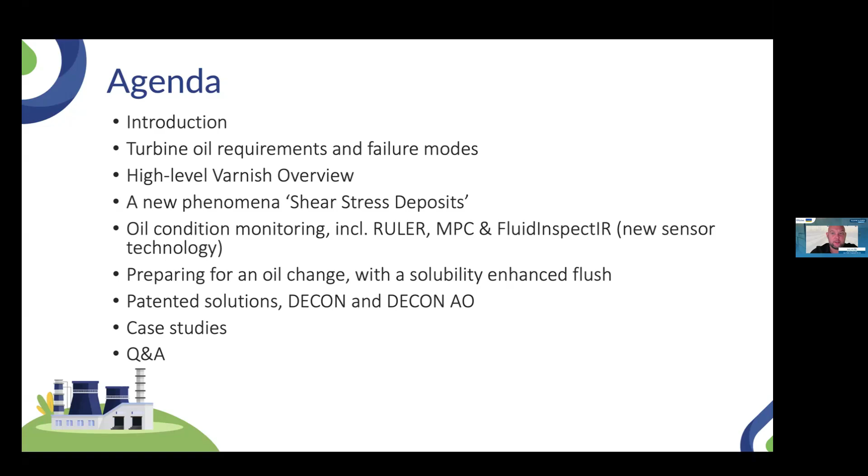All right, thank you very much. So let's get started. Who is Fluitec?

We are in the business of boosting our customers' profits, so your profits. And this coincidentally and conveniently also helps to save the planet, because when we use less, your profit increases, but also there are less CO2 emissions, which is healthy for the planet. So we have an opportunity to boost profits while being more sustainable. That's a unique situation.

You can see on the left side here that we have been certified by B Corp and Solar Impulse, which look at sustainable solutions in the world. We can save 50% or more on oil change costs and achieve 100% reduction in chemical waste. So how can we achieve that? That is what we are going to talk about today.

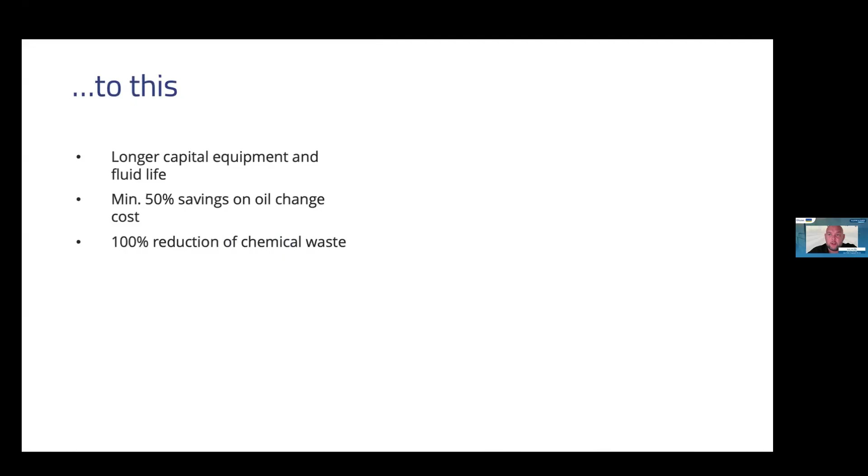We're also going to talk about something called Fill for Life, a new methodology that is now utilized and approved by the world's leading energy companies, but also by OEMs such as Siemens Energy and lubricant manufacturers such as ExxonMobil, for example. We want to go from a consumption model where every time-based interval you change the oil, to a circular model where we can achieve a lot of benefits, such as longer equipment life, and that's how we get these 50% savings on oil change cost.

We do that by changing to a circular model where we do a constant cycle of activities on your lubricants, starting from generating data and then applying the right solutions. That means we can extend the life of the lubricant to a fill-for-life lubricant. Instead of changing it on a time basis, we look at the condition of the lubricant, and if we treat it well, keep it clean and pure, then we can keep it in the system as long as the system is operating.

In short, if you do this correctly, you do not have to change your lubricants anymore. That's why it's called Fill for Life. This means we change from a consumable to an asset, and this has a lot of benefits, of course. I always say the biggest competitor to us, or the biggest obstacle that we face as a customer, is the way that things are being done right now.

It's not some other company that is offering these solutions as well, but we are always fighting the status quo because people are used to doing things in a certain way. The general consensus is if I'm okay now and I don't do anything, my operations are doing fine, then I'm going to be okay, right?

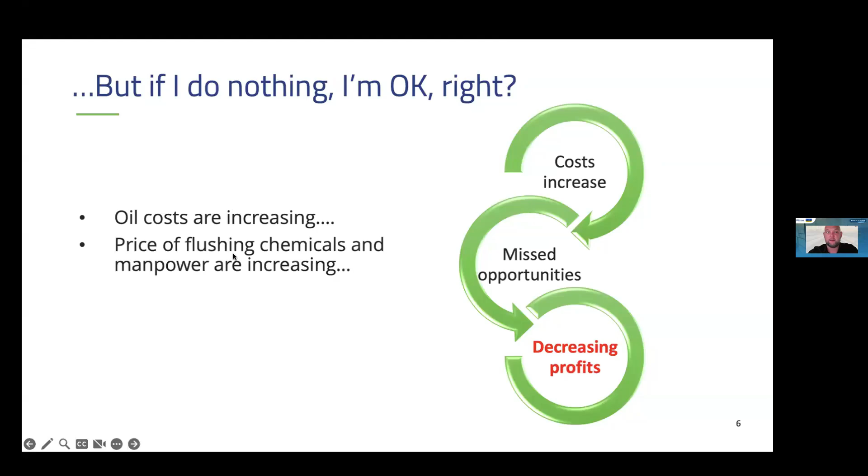But in reality, we're facing a world with ever increasing costs. In some areas of the globe, it's happening really fast right now. You also have opportunity costs that you will miss because you have an opportunity to be more efficient. The price of flushing chemicals and manpower are also increasing, and good manpower is becoming more scarce as well. And also from governments and industry bodies, there's a lot more scrutiny on sustainability.

Everybody is expected to do something to reduce their consumption. So if we don't do anything, we will decrease our profit. It doesn't mean we go bankrupt or there's going to be huge issues immediately, but over time we will be less competitive. So there are major benefits to be achieved by this Fill for Life methodology. And I'm going to show you a case study here now.

This is in a gas turbine driven compressor system where this customer, as you can see on the graph, was doing an oil change based on time. So every 4 years, this whole turbine driven compressor system, about 40,000 liters of oil was drained. The system was flushed and cleaned, and then new oil was entered into the system. At every interval, every 4-year interval, this cost them 350,000 US dollars. You can see that here, oil change 350,000, 4 years later, another 350,000.

So they trialed the Fill for Life to compare it to their time-based interval oil change. And they figured that they only have to invest 50,000 every 4 years into their system in order to keep the oil running. So they save 600,000 US dollars in oil change cost in this case.

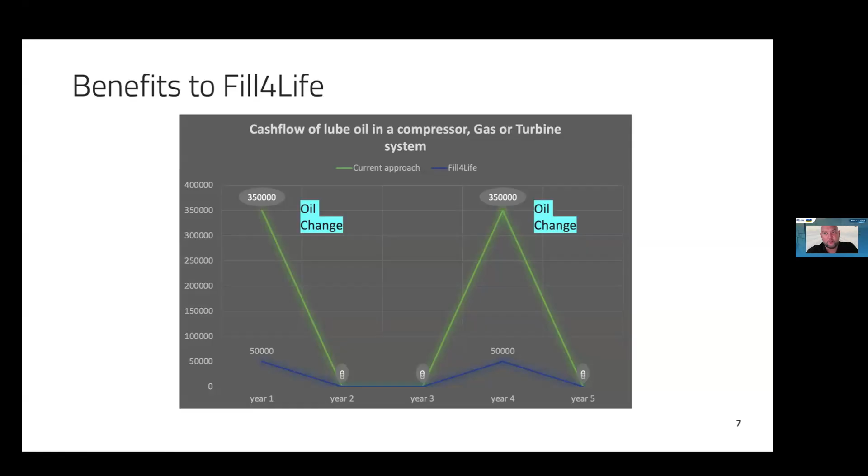So this is only on the cost side. They were already able to save 600,000. In reality, their benefits were in the millions of dollars because they had less downtime, higher revenue. So that's how powerful this Fill for Life methodology can be.

If applied correctly, you will enjoy these benefits of extended oil life, a lot of cost savings, reduced CO2 footprint, and every reliability engineer's dream, improved equipment quality and reliability. This also increases the quality of your production.

So what can we offer in the field to the customer? How do these products look like? It starts with consulting, and what we do today, I think, is also a part of that, where we share knowledge and new things with you.

And then condition monitoring are equipments that we sell to laboratory to analyze the oil. This allows them to be predictive, in some cases even proactive, with their lubricants. And this gives them an opportunity to look at the health of their lubricants and to assess how much life is really left in this lubricant. And that allows them to make data-driven decisions.

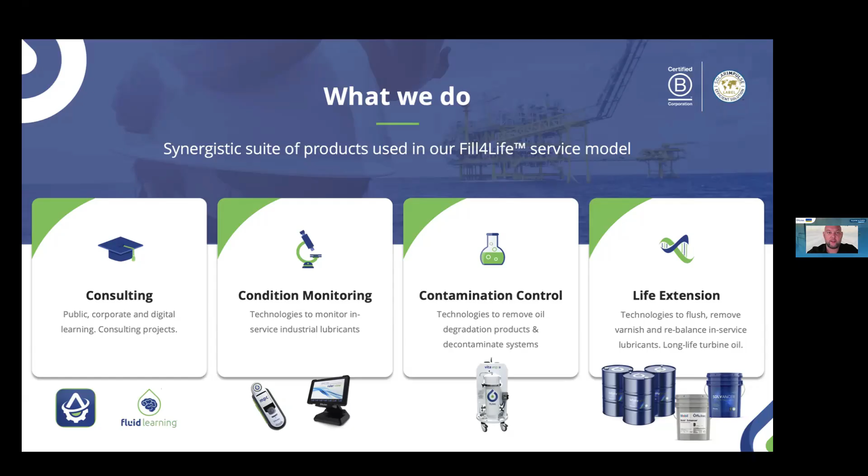For example, Tiara is one of the companies that will be able to provide these RULER and MPC tests for customers to allow them to look at the health of the oil. Then we can choose to do contamination control, which are specialized filters, or we go for what is now relatively new, life extension, where we can add solubility enhancers to the oil or certain chemistry that improve the performance of the oil. And when we combine all these things together, that's how we get to the Fill for Life service model.

But before we get there, let's talk a little bit about lubricants themselves and how we can optimize them, because what is the science behind all this? That's always very important. We're a science-driven company. So I like to show the slide.

Why is it? Because the oil industry is very often perceived as being a dirty industry. It's a dirty brown substance, it's going everywhere, and it needs to go away—all these things that we see nowadays in the market. But when you look at the reality, there is an opportunity.

When we look at how much friction is lost in energy production, including everything that is being produced, that is close to 50%. So of all the fossil fuels being burned to produce energy, almost 50% is being lost. The opportunity for optimizing lubrication means we can reduce this friction. Even if we reduce that by 10%, which is technically achievable, you are going to save a lot of CO2. So lubricants, lubrication, tribology—everything we are doing is enormously important in increasing sustainability and helping save the environment.

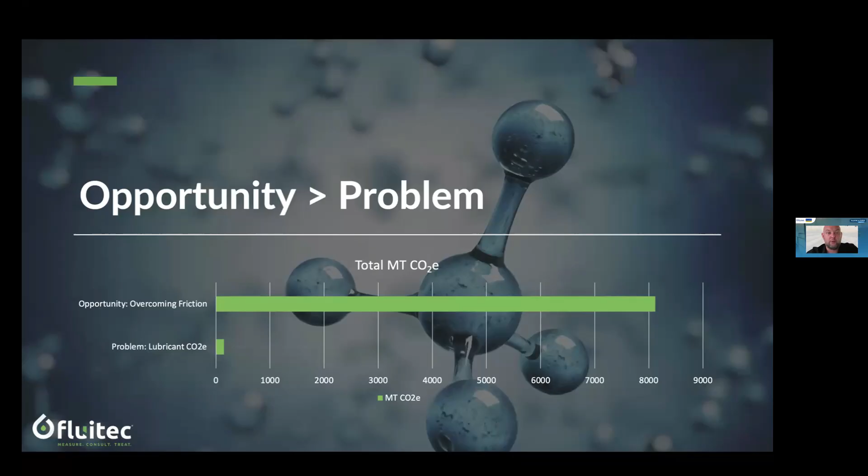So I like to show that because it gives you a different look at lubrication—from being something that's dirty and polluting the environment to something that's actually helping a lot with increasing energy efficiency. It's also a responsibility for all of us in this industry to optimize lubrication so we can contribute to reducing the environmental problem and be more efficient, because it has a big impact on the environment.

So in order to do that, we need to look at what an oil is supposed to do and how we can help that oil do its job. If we zoom in on turbine oils, which are the main oils used in energy production, we know it needs to resist oxidation and keep the equipment clean. It needs to provide excellent detergency and deposit control to keep the metal surfaces clean and keep the lubrication film intact.

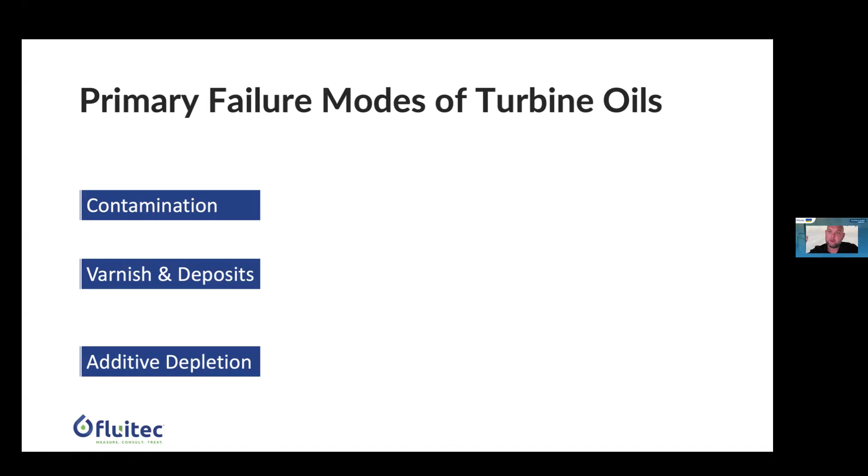But unfortunately, in reality, it's subjected to a lot of environmental circumstances and operating conditions that can interfere with this work. The three main ways a turbine oil fails in the real world are due to contamination, due to producing too much varnish and deposits which interferes with the oil's ability to lubricate, and also additive depletion. Over time, the additives inside the oil will be consumed by its uses and go down, and the depleted additives will form deposits themselves, and the oil will not be able to resist oxidation anymore if there are no antioxidants left.

Contamination will lead to increased wear rates, for example. If you have varnish and deposits in your system, you will experience things like valve sticking and bearing temperature instabilities. When your additives go down, your oil becomes very susceptible to sudden and rapid degradation, which will then be an immediate reliability problem, forcing you to shut down your system.

Luckily, there are solutions to all these failure modes. Contamination can be solved by filtration. Varnish and deposits can be solved by a special kind of filtration called ESP, or we can add something to the oil to prevent deposit buildup. Additive depletion can now be solved by replenishing additives to your oil. This is relatively new and has been recently approved by a couple of big OEMs, and is in use by, for example, ExxonMobil with their oils. So it's a new solution that is going to save a lot of money and trouble.

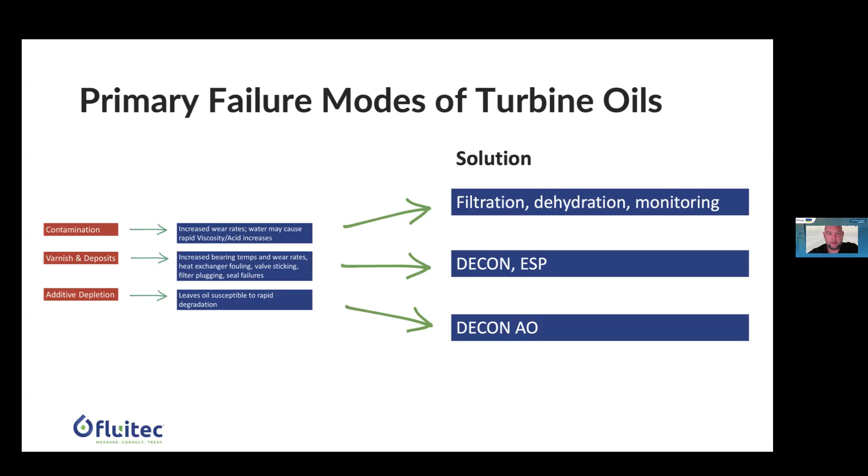So what is varnish? What do we mean when we say varnish? Varnish is actually a chemical change of the oil that is making up deposits. The oil starts to be consumed and starts to form chemistry inside—it starts to form different molecules that are then deposited in your system. So it's coming from the oil itself, and that's why we always say it's an oil-derived deposit. Unfortunately, it's very small molecules, very soft and malleable, and very often soluble in the oil as it goes through the filters. So your normal depth media filtration system will not solve the varnish issue—that is the main challenge. Keep that in mind as we talk about varnish.

So this is what happens on a molecular level. If there is any chemist in this webinar, I have to give the disclaimer positioned here on the right as well—this is for illustration purposes only.

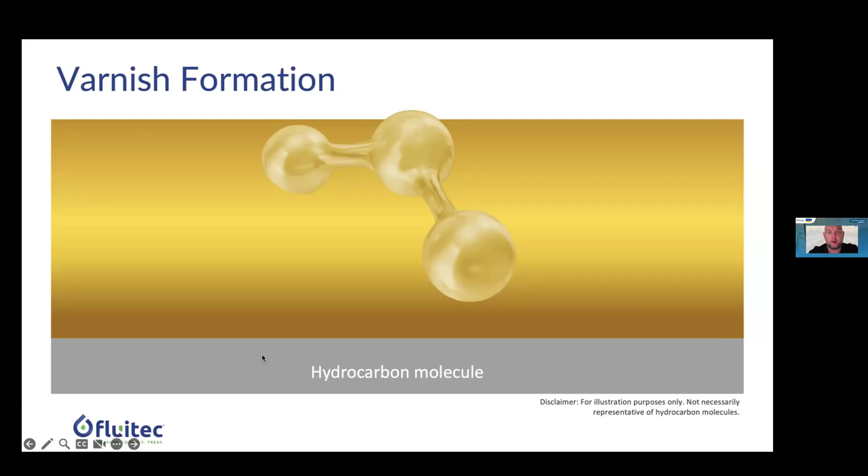It's to try to make you understand how this works on a molecular level. It's not an accurate depiction of a hydrocarbon molecule, you know this, but it's designed to make it a little bit more easy to understand what is happening in the process. So imagine this is a hydrocarbon molecule, an oil molecule that you see on the screen.

Now suddenly this is subjected to heat and it starts to oxidize. So what happens when a molecule oxidizes, it loses an electron. That means it has a positive charge, right? So it's a charged particle. You can think of something like static electricity, which we all encounter in our life.

If you ever, when you were a kid, you would rub a balloon on your vest, for example, and then you could stick it on the wall. It would stick there. You know, that is charging. That is static electricity. By the rubbing, you're actually destroying the molecules and you're creating a charge.

So this is also happening very slowly in the oil to your molecules and creating all these little charged molecules, which have a charged head here. So they are attracted to other things because they have a charge. And what they are very attracted to, what they really like, are other molecules that have a similar charge to them. So now you get likes like, that's a chemical term, believe it or not, like dissolves like as well.

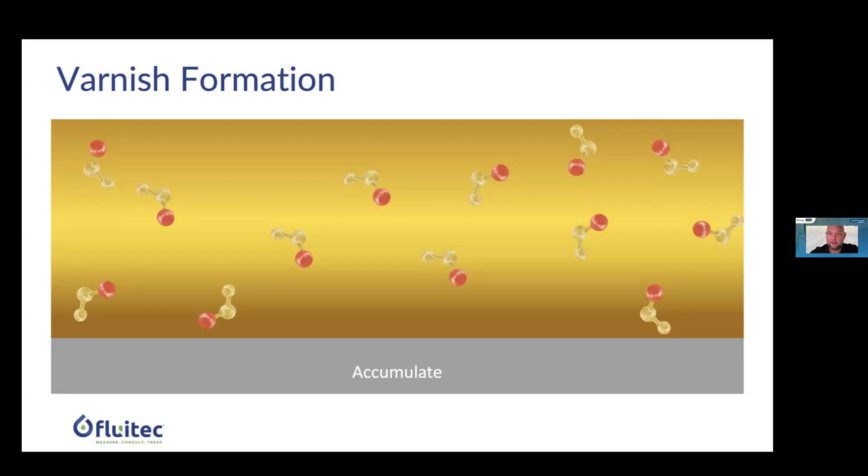So they like to go together. They like to bond together and they form. So they're floating in your oil and they make friends as they are floating along and they go together until they have created enough molecular force around their polar heads that they actually start to form a new molecule. So this is happening in your oil. Around this polar head, these molecules are agglomerating and forming now a new molecule, right?

Now the oil says, hey, I'm not designed for this. I'm not supposed to have you here. So it doesn't like it. It's a polar molecule in a non-polar fluid. So it starts to be pushed out.

And what then this polarity likes to do, it loves metal because metal is also having polarity. So they love to settle out after they multiply and the oil is no longer able to contain them in solution. They love to settle out into the metal.

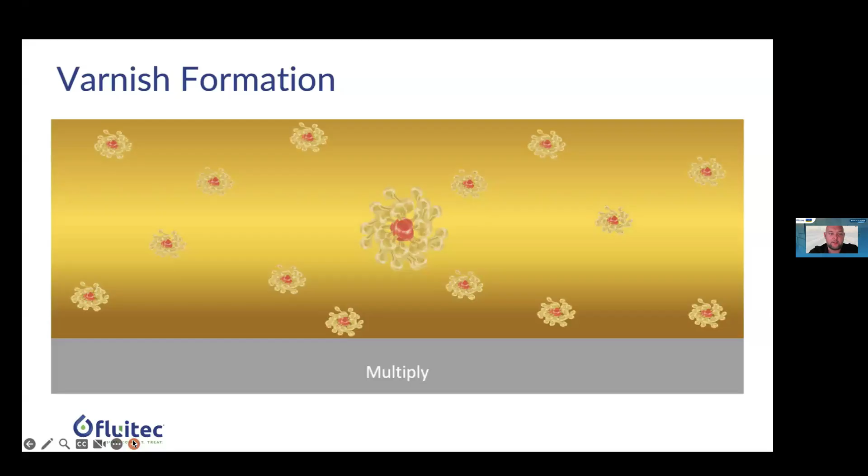Now, if you know metal, it looks like under a microscope, it has all these crevices and mountains. So these molecules can very easily settle inside these crevices and they will create a very hard layer of lacquer that is almost impossible to wipe. And you will need heavy detergents in chemistry in order to remove this again from your system. So this is how, on a chemical molecular level, varnish starts to appear in your system.

And once you have this, it will attract more molecules because remember, these are polar and here is oil flow. The oil is flowing past them. So if you have these varnish constituents in your oil, they love to bond together to these molecules as well. And it will accumulate and increase.

So when this happens in your oil, what happens? What do we see in the practical world? First of all, you will see your lube oil reservoir changing in color very often. But the main reliability issue that we see with this is sticking control valves. Blocked orifices to actuator valves, for example, leads to trips during startup. And that's the most common issue that we see when we have this issue.

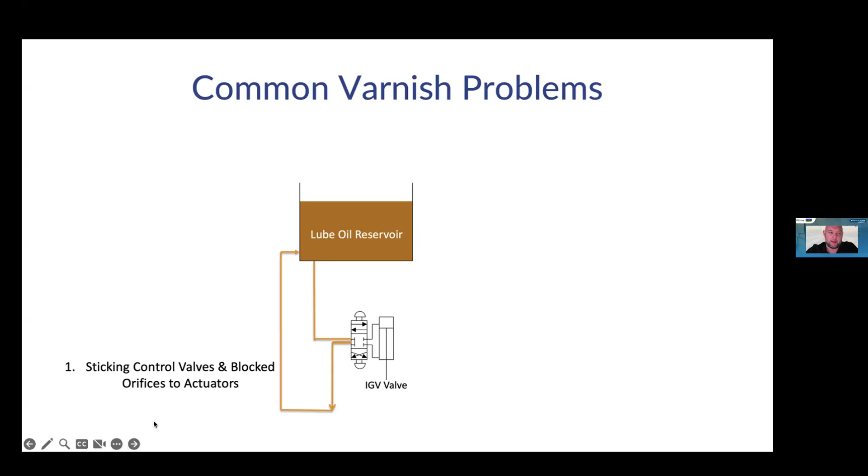Closely followed by increased wear and higher temperatures on bearings. So the bearing surfaces love to accumulate these varnish, and also it's a condition where the oil is subjected to a lot of mechanical force and pressure. So the molecules are very easy to be brought out of solution and they will form in the bearing layer. So that's the second most prevalent problem.

You can also get seal failure because the deposits are increasing the tolerances, allowing gases to penetrate the oil, and that will lead to even more degradation in molecules.

But also when we look at heaters and coolers, they are heat exchangers, right? And the oil is flowing. So when they are oil wetted, then at that point where the heating or cooling action is taking place, there is a lot of stress on the oil. And sometimes the oil flow is not that fast. So it gives a lot of opportunity for these varnish molecules to settle out onto the heat exchanger. And then you get an insulating layer of varnish or lacquer on the heat exchanger. And this greatly reduces the efficiency.

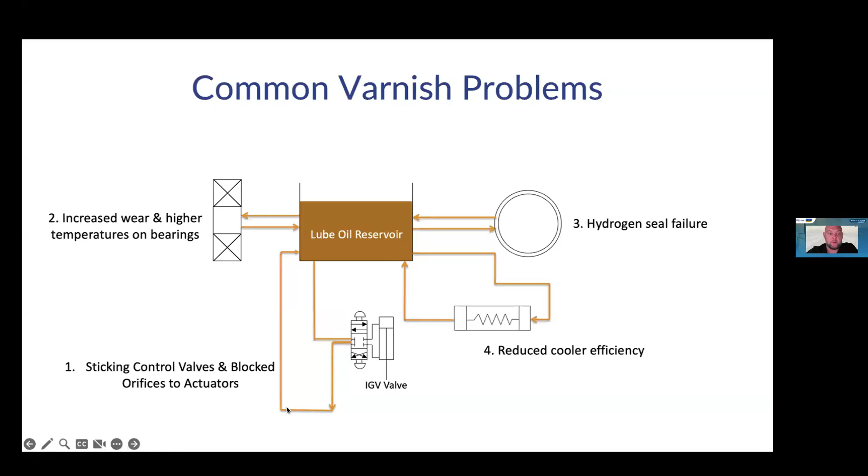So when we are able to solve this, we can also prevent all these reliability issues from happening.

So let's go through some examples that I've talked about. When we look at bearings, we can see varnish interfering with the oil wedge, meaning it's no longer able to form an oil film. Then you get these degradation molecules settling out there, and that means the oil will no longer be able to form the film. So you get wear of the bearing, and this will lead to increased bearing instability and vibrations.

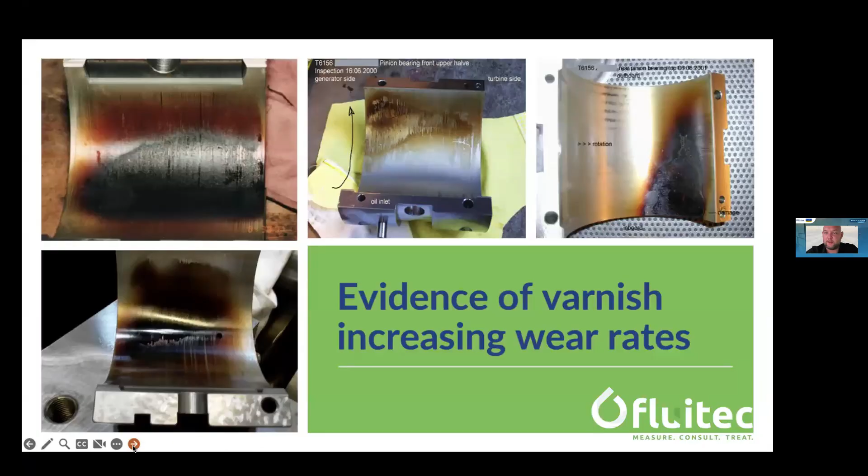Higher temperatures in general. Also on thrust bearings, you can see when they are coated with deposits, and then you get something called adhesive or fatigue wear, where there is metal to metal contact. Slowly the particles crack and then they will be released into the oil. Then you get what's called micro pitting, which leads to bigger openings in the metal. You get macro pitting, and this will lead to a failure. It can be very localized in your system, so maybe you don't even know that it's happening until you really have an issue that is occurring.

So this layer that you see here on the screen, this little varnish layer, is like an insulator, so it keeps the temperature. Remember, one of the main functions of an oil is to cool the metal, right? So it's to lubricate, to reduce friction, to prevent wear, but also to dissipate heat, to keep the system clean and to keep it cool. So when there is varnish in your system, the oil is no longer able to do this because this is an insulator that's keeping the heat, and the oil cannot dissipate it.

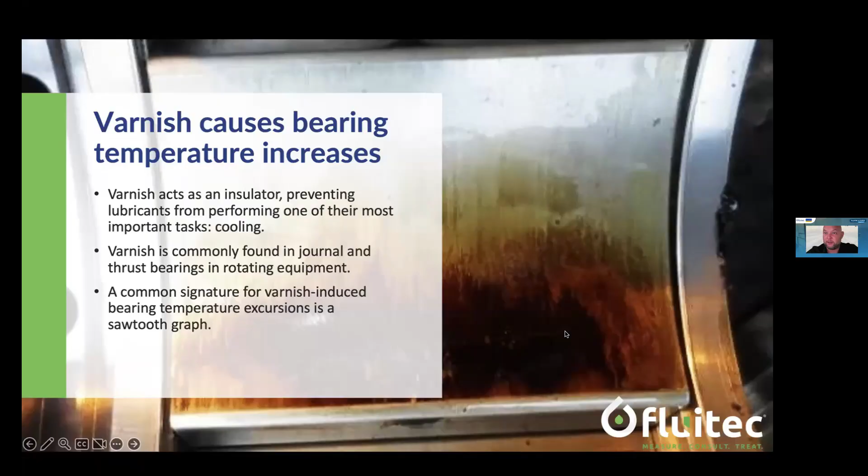So that's what we see when we look at this sawtooth graph here. We see bearing temperature starting to fluctuate. This is an extreme case where it went really out of hand. But when we see these kinds of spikes and then the temperature going down, we are very sure that this is due to deposits, because this layer of varnish will continue to change in thickness. So you get a buildup of varnish and then it becomes thinner again. Your temperature goes up and then it goes down again because there's a lot of pressure in the bearing. So intermittently, the varnish gets removed.

So when we see this typical graph in your bearing temperatures, we are already 99% sure that this is caused by varnish. So please have a look at your bearing temperature increase. If it looks like this, then we know that we have a varnish issue that we can solve.

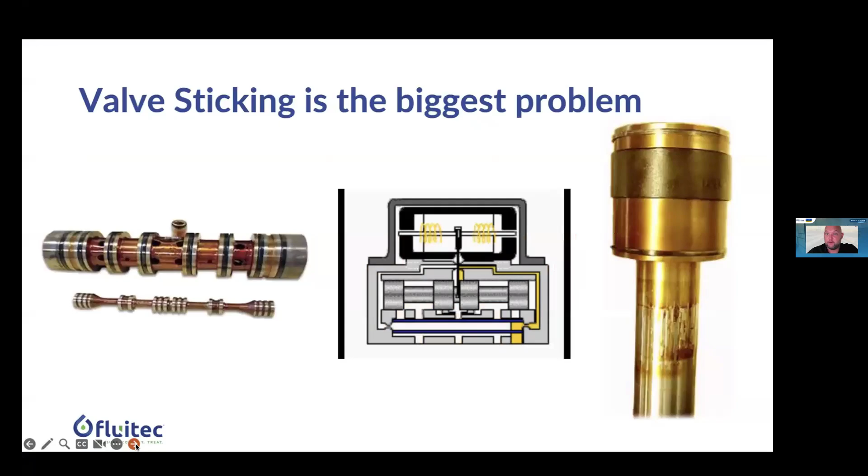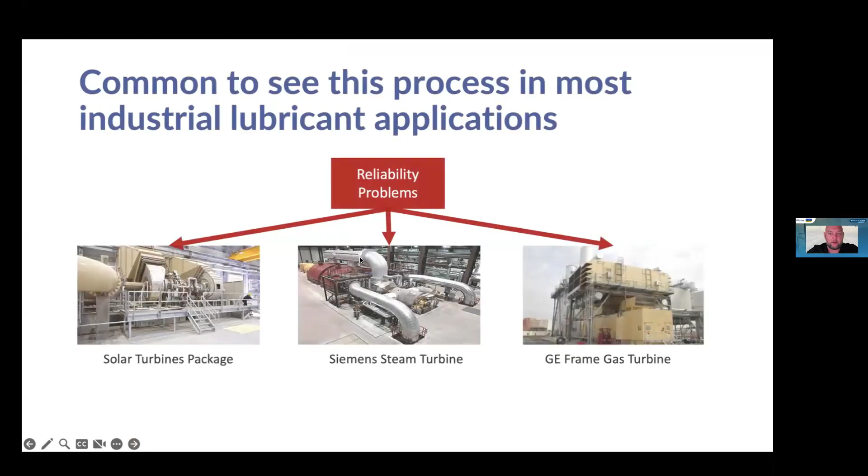Right, so that is general varnish and a high-level overview of what it does to your system. Now let's talk about this new phenomenon that we have quite recently discovered, called shear stress degradation. So what is this that is going on? Just now we explained how varnish can affect the oil as a result of oxidation. In gas turbines and steam turbines used for power generation, we know that the main failure modes are due to oxidation that leads to deposits and varnish. So we know where the reliability problems come from in the oil, but we saw something interesting in other applications.

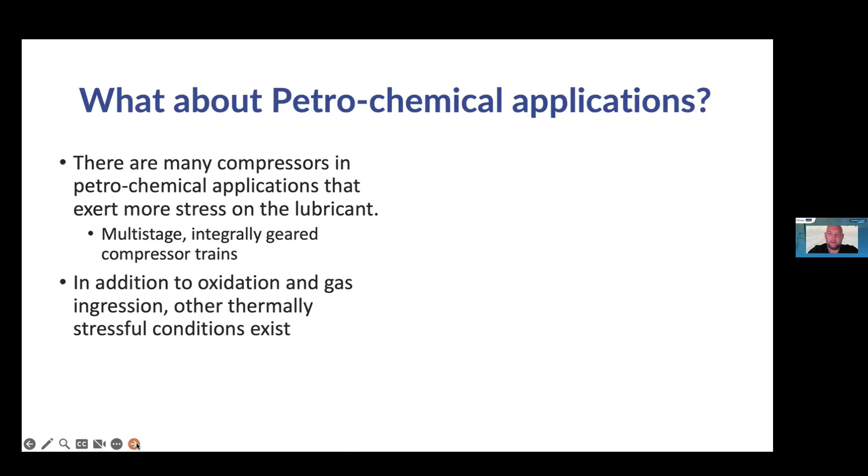Such as petrochemical, where we have a bit of a different demand on the oil, because these are very high rotational speed compressors, very high RPM. So there's a lot of mechanical stress being exerted into the oil. You can see here that some of these compressors have 50,000 RPM speeds or more. So you can imagine these are gigantic speeds, and the oil is subjected to a lot of stress.

We saw in a lot of cases this bearing instability happening, and it's happening more and more because of more demands on the equipment, higher loads, lower oil sumps as well, smaller oil volumes, but also different oil formulations and different properties of the oil.

We see a lot of these cases where we have the bearing temperatures becoming unstable and fluctuating. But then when we do an oil analysis, we see that very often the varnish indicator is still very low. So it doesn't really point to varnish being the issue, but we still see these bearing temperature fluctuations. So what is going on here?

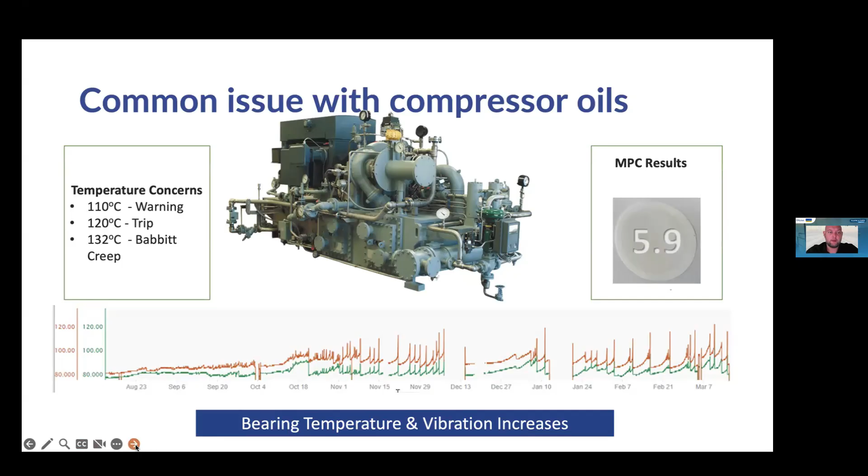We figured that the main mechanism at play is what is called shear stress deposits. And this is due to the very high temperatures that are generated inside the bearing. So I'll make this a little bit visual for you.

But to detect this phenomena, we need to use vibration sensors, temperature probes, or physical component inspections. So it's something that we really have to monitor physically on the equipment in order to detect it. Unfortunately, oil analysis is not always very reliable to detect shear stress deposits. So please keep that in mind in your reliability programs.

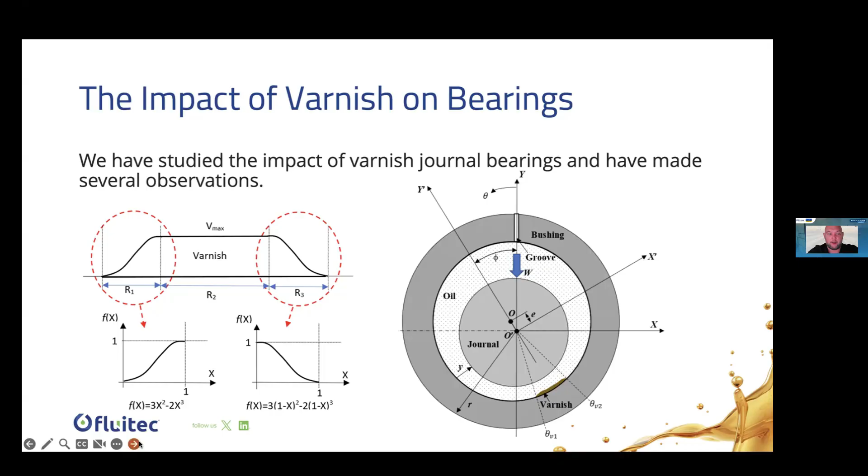But what is important to know is that we have done a lot of research together with the bearing manufacturers in order to figure out this problem, and that is how we discovered how it works. So this is just to show you that we have done our homework actually.

So what we have found is varnish increases temperatures, and it happens where the oil film is at its minimal thickness. So where the oil is thinnest, the temperature becomes the highest, and then in your big bearing system, you get only a very small patch of deposits that is being formed on a certain area in the bearing, which is usually where the hotspot is, right?

So that means the oil itself is fine. It is just generating this localized deposit, and that makes it such a tricky problem to analyze.

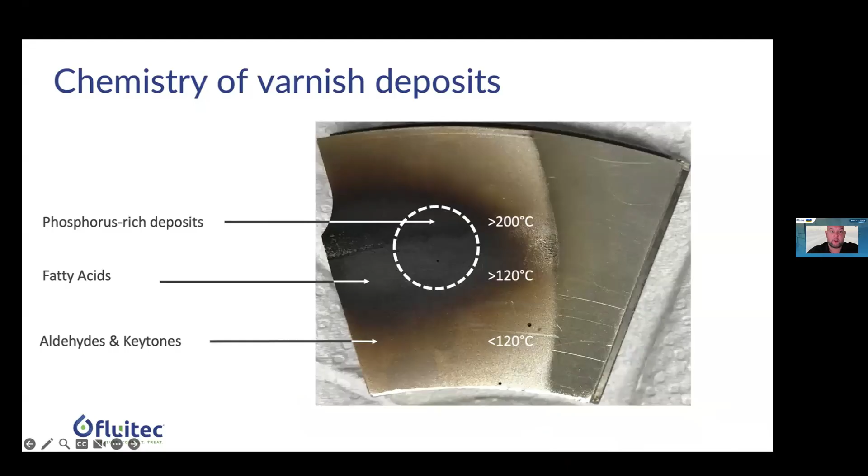So we saw that there are some things in the bearing that we know only react at temperatures higher than 200 degrees C. So for them to be on the bearing, we know these temperatures must be higher than 200 degrees C. And we're talking about phosphorus-rich deposits here.

So we looked deeply into it, and we saw that in the bearing, we have fluid friction occurring. So what does that mean? It means that, due to the rotational speed, there is an oil layer that is flowing with the shaft, and there's an oil layer that is flowing with the bushing. So you get a layer of fluid flowing in one direction, and another layer of fluid flowing in the other direction.

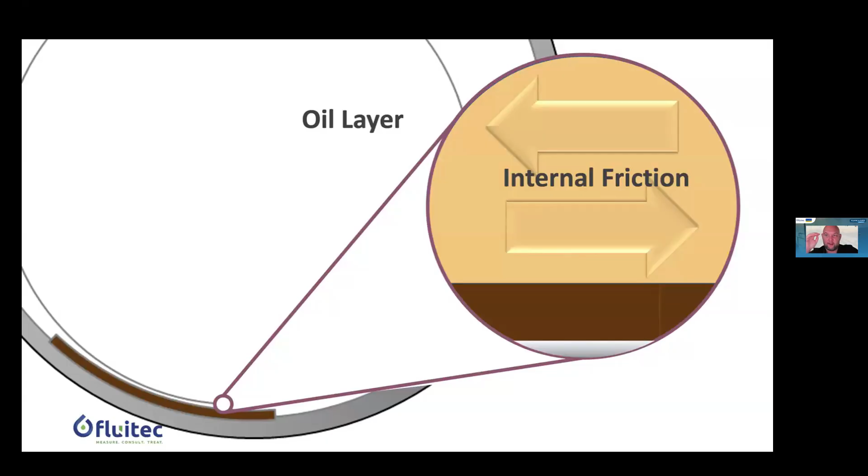So on a molecular layer, we get fluid friction, two fluids floating past each other, and this generates heat. It's very contradictory, I know, but because the oil film is so thin there, and there is pressure on the bearing, this allows heat to be generated inside the fluid.

So that is causing these temperatures locally to go up to 200 degrees C inside the oil itself. That means your temperature probes will not pick up 200 degrees C, but they will just see an increase in bearing temperature. The actual temperature inside the oil can be higher than 200 degrees C.

Now the oil is not designed for that, so it starts to decompose and it starts to generate shear stress degradation, and then you get these localized deposits that are attaching themselves to the metal. And then that is what we call shear stress deposits.

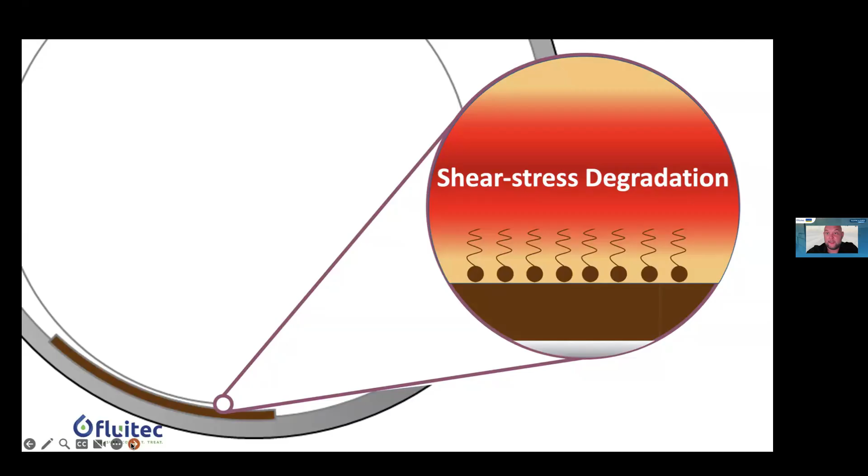They will build up over time, and they are comprised of many layers of degradation products. So it can be hydrocarbons that are destroyed there, or additives that are destroyed in that kind of environment that will then attach themselves to the metal. So that's shear stress deposits, right?

We will show you how to deal with this and how we can solve it at the end of the presentation. But in order to understand how we can better monitor all of this, we need to start with the basics. So let's talk a little bit about some oil analysis basics, right?

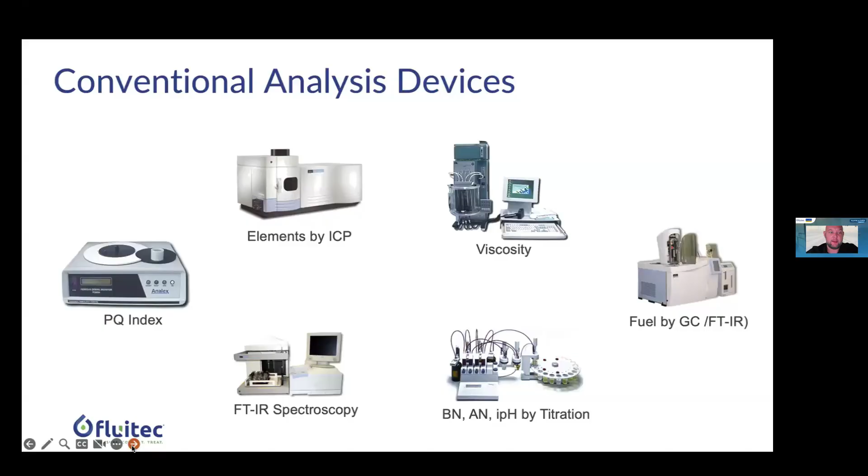So we have a lot of conventional oil analysis at our disposal, but in order to have a very complete turbine oil prediction, or condition monitoring program I should say, we want to perform a slate of tests on the oil, which consists of looking for varnish potential. Now, the main test to do that is called the MPC.

The MPC is officially ASTM certified and is now the most widely used test to look for bulk oil varnish. You can also use ultracentrifuge, for example.

When we look at fluid degradation, we can monitor how the oil's additives are being depleted. We do this via the RULER test to actually look at the amount of chemistry that's left in the oil, giving us a way of looking at how long this oil is going to last. And RPVOT, a performance test, looks at the actual oxidative resistance of that oil at any given moment.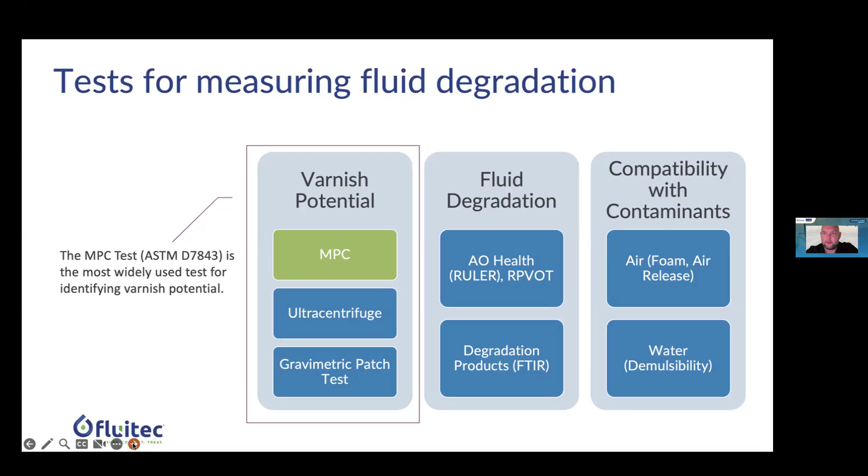So this is an example of an MPC test. With MPC, we run the oil through a patch, then we rinse the patch with a non-polar solvent to make all these varnish degradation products come out of solution and attach to the patch. Then we measure the patch and we get a delta E number that gives us an indication of how much varnish potential there is in the oil that we've just run through this patch.

We say anything below 15 is considered normal, anything above 15 to 30 is considered a potential issue, something we can work with. Anything above 30, as now indicated by most OEMs, is critical at this stage. So the number indicates how likely the oil is to form varnish in your system.

It's important to show there are some helpful things we can see physically from the oil, right? The way it flows, whether it has some sediment in there. Sometimes color can be indicative of something, depending on what color. But when we talk about varnish, usually color is not related to the varnish potential.

So you see here on the right side a very nice looking oil, light brown, translucent, looks great, but when we run the MPC test, it's actually critical, 37. So this oil is very prone to producing a lot of varnish. Whereas the oil on the left, you think it's dark and doesn't look very nice, but it's still clean and translucent, so that doesn't mean there's an issue.

When we run it through the MPC, it's actually only 9.1. So this oil might change its color because it's doing its job by keeping all of these contaminants in solution inside the oil, so that can also be a good thing. Color is not indicative of how well or not your oil is performing when it comes to varnish.

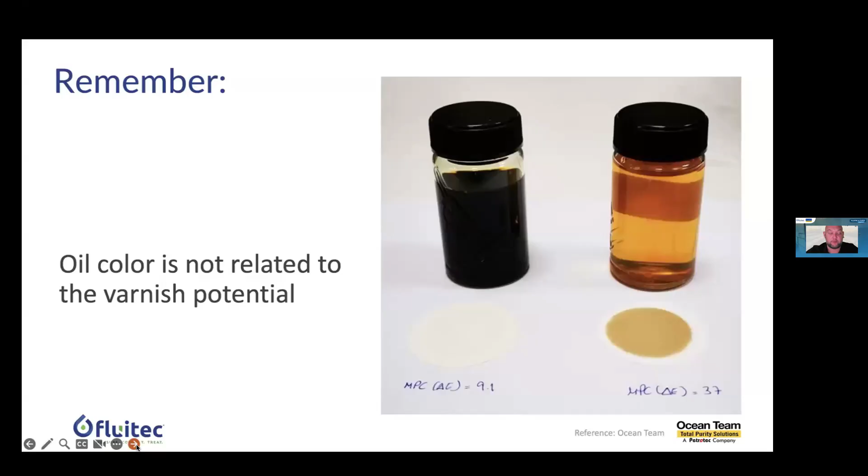We can also look at the colors on the MPC patch as an indication of some issues. Certain additives will give away a certain color. So when we know it has a typical gray, green, or black color, that's usually indicative of the ZDDP creating issues, which gives us a bit of an indication, for example.

So we have the ruler test and RPVOT. What can we do with the ruler test? It's a very important test to look at how much additive is left in your oil. It's always a test that's related to the new oil, so we compare the used oil with a new oil sample. In this case, we have a Mobil DTE 846 that is then compared to the new oil.

So the used oil is the red line here, and then we can calculate that a reaction is taking place. These are the aminic antioxidants and these are the phenolics. This oil has two antioxidants, and we can see there's much less reaction here on the ruler test, meaning the phenolics are almost gone because there's no more reaction. But the aminics in this case are still quite healthy, still quite a lot of aminics.

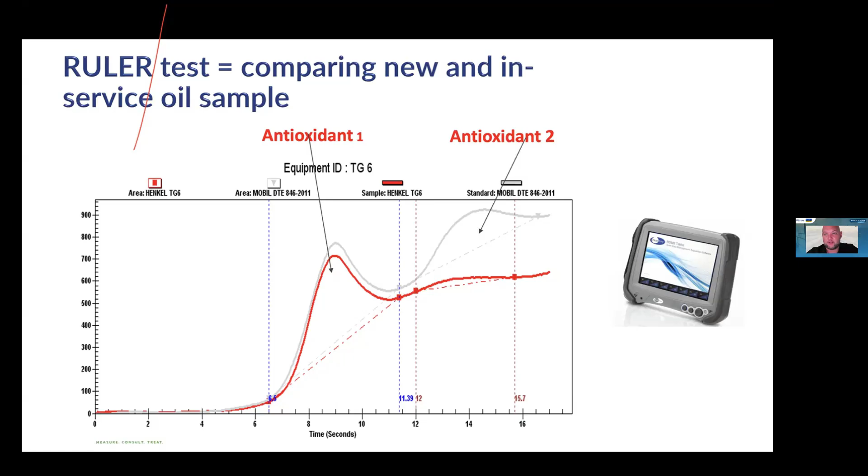So perhaps this is an oil that is still useful. But the ruler will calculate a value that we can then use to determine how much life is left in this oil, how much additive it has to resist oxidation.

So when we trend the ruler test, because it's a trending test, that's very important, we always look at different samples at different time periods. So this is not one test, this is the same oil tested six different times.

So this is the first one, second one, third one, fourth one, fifth one, and the sixth one is unfortunately completely collapsed. So nothing to see there anymore.

And we can compare this with MPC. What we see is always a correlation. It's not a direct correlation, but it's a pretty steady correlation between the reduction of additives and the formation of varnish. So the moment your additives deplete, typically your oil starts to produce a lot more varnish on the MPC test. So when we combine these two tests, we get a very good indication of how healthy your oil is and how likely you are to have problems.

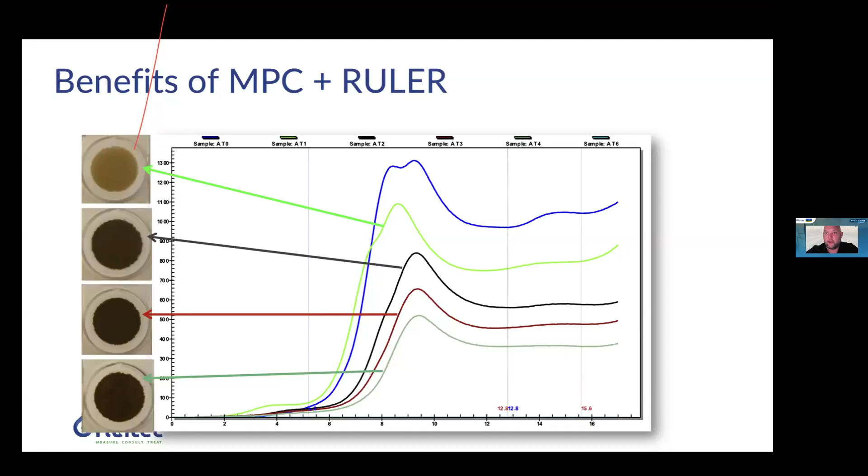And this also gives us a lot of data to then come out with an action plan. Because what we want to do with an oil, we want to keep the additive at a very healthy level. That means more than 50% of whatever secondary antioxidant or primary antioxidant is left in the oil. And we want to keep the MPC below 15. As long as we do that, we can say this oil is in a normal condition. As long as an oil is in a normal condition, there is no need to change the oil. So we keep it there. That means you can have your fill for life benefits that we showed in the beginning, and that's how we can generate a lot of reliability benefits and cost saving.

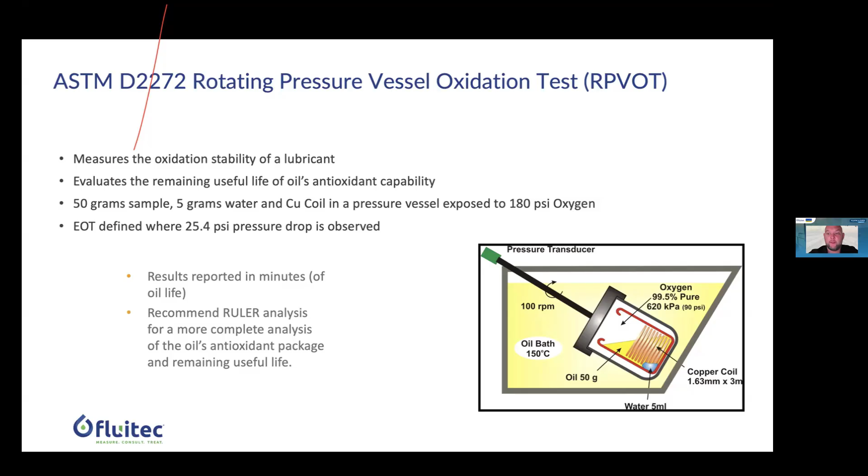So the RPVOT test, just briefly mentioning this, it's also a reliable test that is a very old test, being done for a long time to look at what is the current oxidation stability of the oil. It doesn't give you any prediction about how your oil is going to be in 2 or 3 months, right? We can only do that with ruler trending. But if you want to know how good your oil still is at resisting oxidation right now, then the RPVOT test can also help to determine that.

FTIR spectra can give you an idea of what kind of chemistry is in the oil. It can give you a warning when there are some contaminants, or maybe a wrong oil has been dosed into the system. And it also gives you an idea about how much antioxidant molecules are still inside your oil. The main difference between FTIR and a test like Ruler is that FTIR looks for the molecular signature, but it cannot detect whether this molecular signature is still an active chemistry. So it can also detect dead antioxidants that have already been spent, that have already been used up, but it's still being detected in the FTIR test.

So that's something that's very important to understand when we look at condition monitoring. Ruler, FTIR - sorry - is perfect for looking for contaminants and general chemistry in the oil, but it cannot tell you whether the molecule is working or not, or still interacting with oxidation. Only the ruler test can do that.

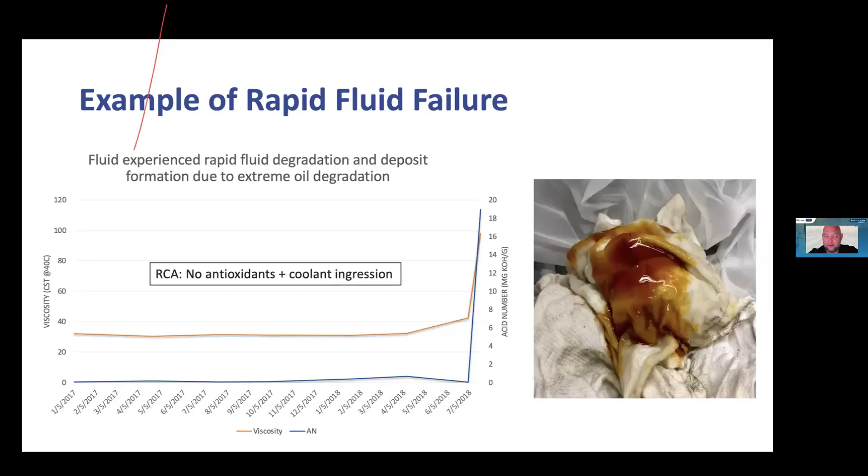So a little bit about online condition monitoring. This is now coming, and this is a new test. So what we see still, even though we do condition monitoring, we sometimes still see a very rapid failure due to oxidation, right? When you have extreme oil degradation, can be due to contaminant or some circumstance - in this case it was a coolant ingression - and there were no more antioxidants, and then you have immediately a failure. So to prevent that, we can add online sensors to the oil.

Varnish goes up, I should say, sorry. So this is the most important criteria to monitor to determine how healthy your oil is. And when you're in this spectrum, you can actually do a lot of action on your oil.

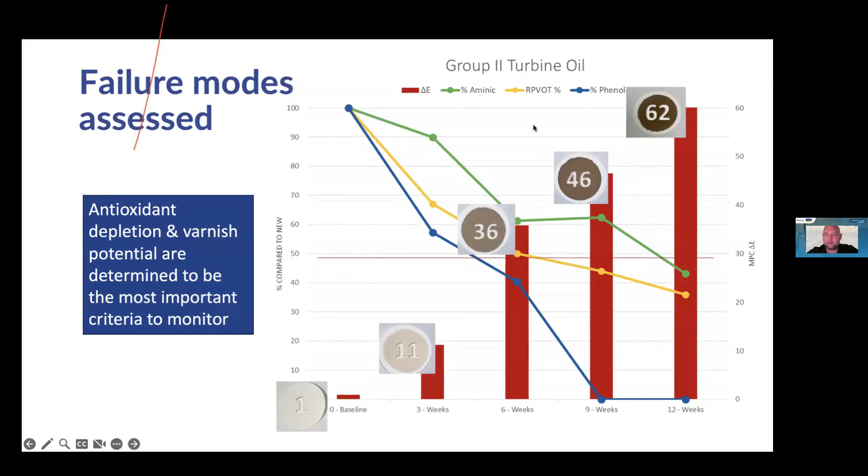So another thing that we can do to give extra certainty is online sensoring. So we can install a sensor that takes a little bit from the oil line at any given interval and starts to run an FTIR spectrum. That's why it's called Fluid Inspect IR. But this is an IR spectrum that is specifically calibrated to your oil. So when we install this, we also calibrate the sensor according to the oil. So it works through the wavelength absorption spectrum of an oil. So it's the same as an FTIR.

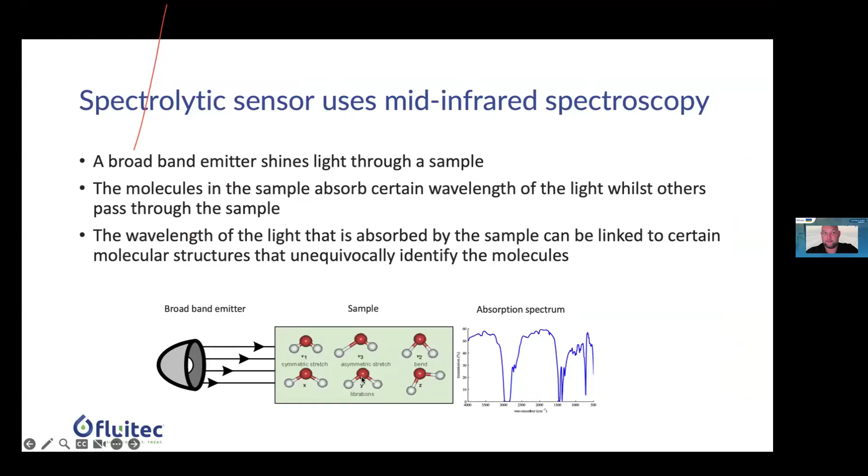And this gives you a good spectrum of what is the kind of chemistry that is in the oil. But it's doing this constantly at regular intervals, installed in your system, taking samples so you can have an early warning system.

It's optimized to measure the amine or phenol antioxidants that we see in turbine oils. It looks for oil oxidation, because when oil is oxidizing, it produces certain byproducts that the FTIR can detect. And when we have something called solvency, which is a protection against varnish, this sensor can also detect the amount of solvency left in the oil, so you know how good your varnish protection is.

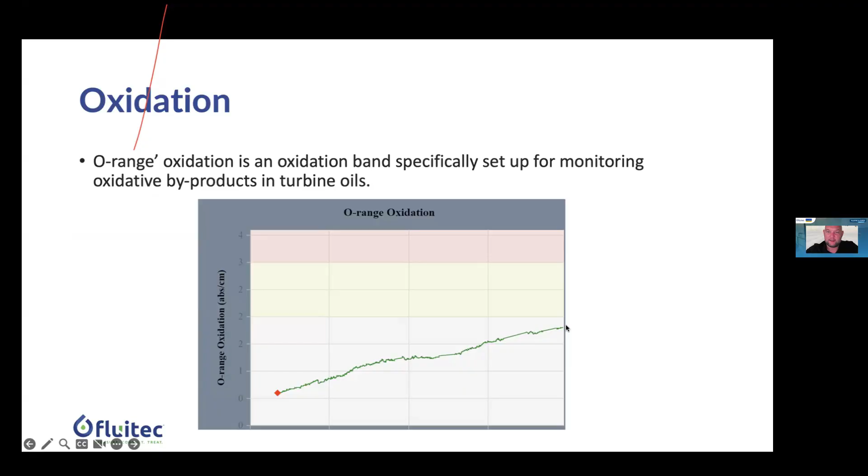So here you can see the oxidation byproducts that it can detect. This looks for the oxidation of the oil.

So that's condition monitoring, right? But let's also talk a little bit about some turbine oil performances in the market and selection of turbine oils, to help you determine what you can do to select the best oil.

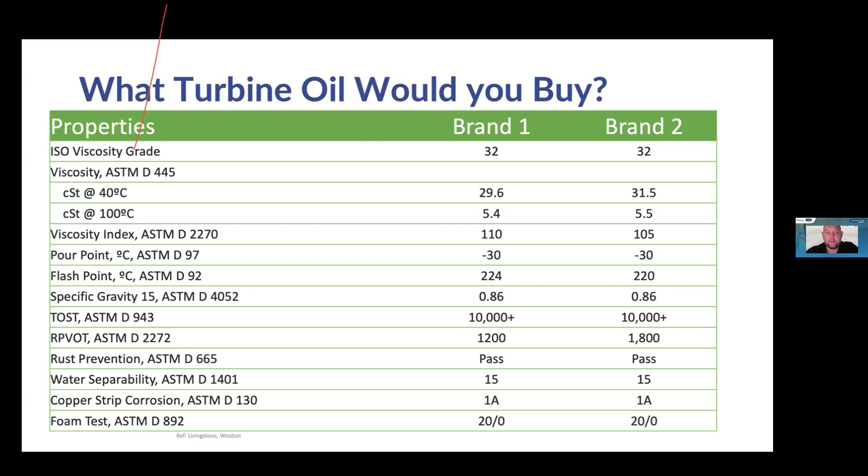Normally the oil is selected based on performance specifications shown on a data sheet, but this doesn't tell you that much about how well an oil is going to perform over a certain period of time. It might confirm that it meets the OEM specification, but it doesn't give you much more than that.

So we have devised a test that is now also undergoing official ASTM scrutiny. We expect this to become an official ASTM test, where we can predict how an oil is going to degrade. It's called the turbine oil performance prediction test.

The oil is in an oxidative bed at an accelerated, elevated temperature, which accelerates the oxidation. Then we take a sample cell at 3, 6, 9, and 12 weeks for testing. Every week in this test simulates about 1 year of real world conditions, so 12 weeks would mean 12 years in the real world.

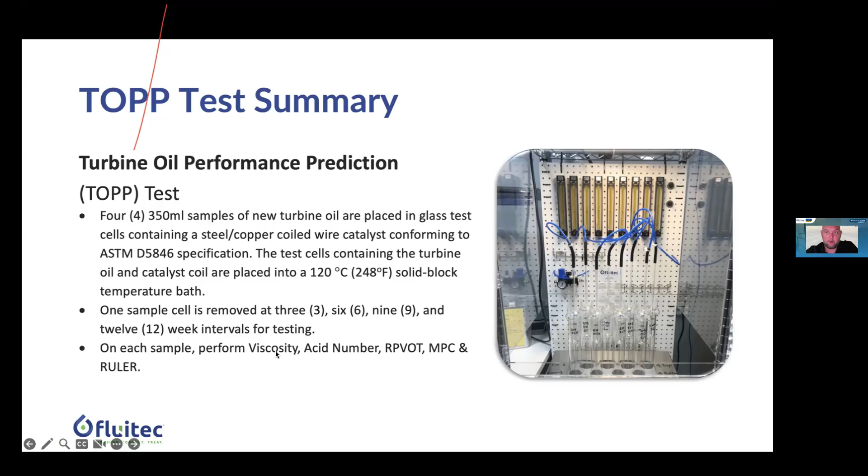And then we can do some tests on the sample to determine how well this oil is performing. So here we can see a very normal oil, one of the biggest market shares in the world. You can see it has quite a rapid increase in MPC, but the additives deplete pretty gradually. So you could actually do a lot of actions on this oil if this would be your degradation pattern in the real world.

But what was a little bit surprising, and maybe also a bit shocking to the OEMs when we did this with them, is that when we analyzed 31 different oils that are all approved by the OEMs, we can see that there's an enormous variety in performance.

So for you as an end user, if you have a turbine, which is a very valuable asset, you can choose any one of these 31 oils. But if you choose oil number 28 instead of, let's say, oil number 6, that's going to make a lot of difference. So your neighbor has chosen oil 6 and you have chosen oil 28, and you're having a lot of problems, but your neighbor doesn't have any problems because he chose a different oil.

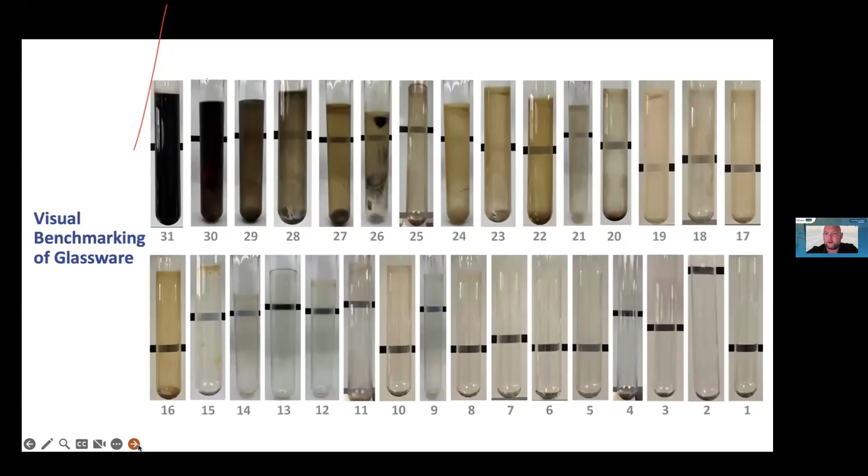That's the reality we are facing in the world. And this is not due to any hidden agenda or wrongdoing, because oil formulations are always a compromise. A formulation that performs well in one condition might not perform well in another. It also has something to do with availability of base oil, market conditions, the willingness of consumers to pay certain prices, availability of raw materials, and different branding in different regions. A lot of factors contribute to this wide variety of performances that we see.

So unfortunately, synthetic oils also do not solve the varnish issues. They still produce varnish, as you can see here.

So in order to make things easier for the end users, for our customers, we wanted to solve these issues of varnish. So we spent years, maybe even decades, for product developers to come up with a solution that is easy to use for the customer. And that means we do not have to undergo any downtime due to these issues. And this is now in the market as Decon, a proactive and preventative measure to varnish.

So what does Decon do? It stands for decontamination and deposit control. That means once you have varnish in your system, Decon can help you clean out this varnish and decontaminate your system. So it's a reactive way of doing things, but it can also be used proactively, where we add Decon to a system to prevent the varnish from building up in the first place. And that is the deposit control aspect of Decon.

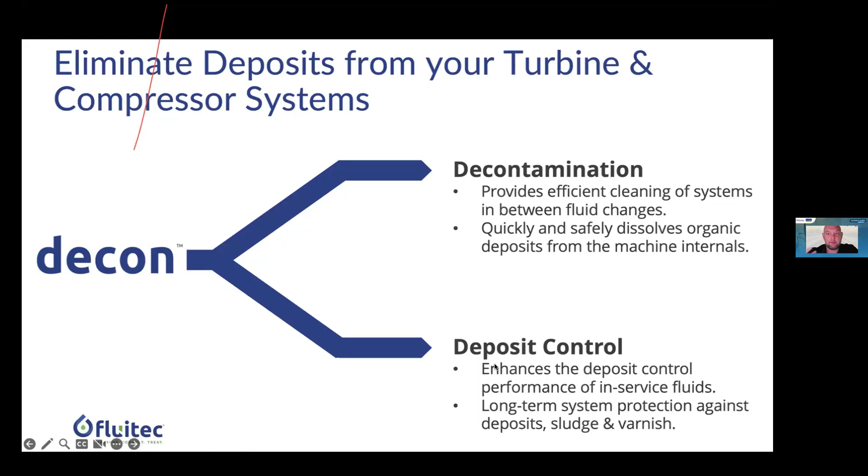So it can be in your system for as long as the oil is in the system. It is classified as a group 5 base stock, so it does not contain any additives. That means it's very benign to the oil, and it's compatible with any group 1 to 5 base stock.

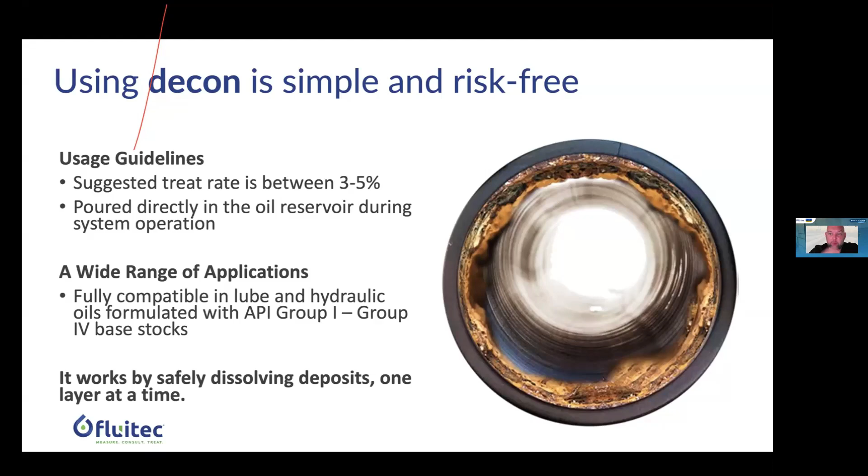Usually it's between 3 to 5% poured directly into the oil reservoir, and it's fully compatible with group 1 to 4 blended base stock. That means almost all the oils in the market, definitely all the industrial oils used in turbines and compressor oils. And it works safely by slowly removing the deposit, so you don't get a quick dump of material into your system. It really slowly dissolves deposits from your system internals, so it works in a very safe way.

So let's go back to our friends here, the oxidized molecules. Let's see how they are doing. This molecule, like we showed in the beginning, is attacked by oxygen and heat. And remember, this is now a charged particle that loves to interact with other charged particles.

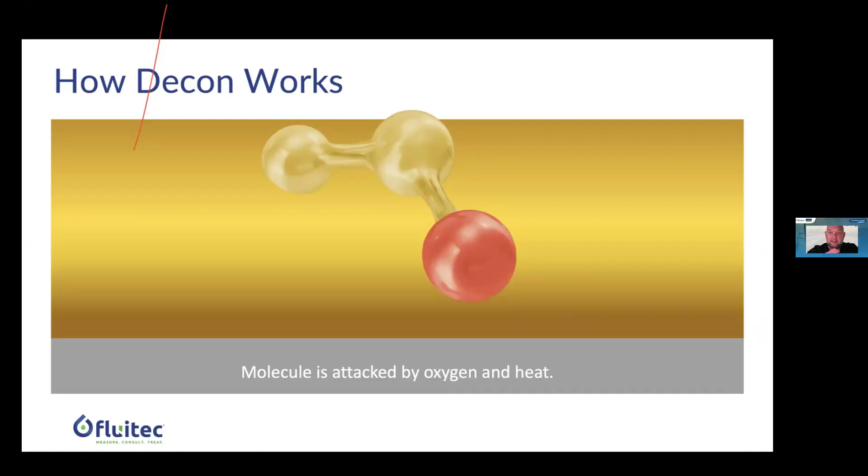But this end user has been very smart, and he has bought some Decon from us, and the Decon is in the system. So now, instead of having the reaction that we saw earlier, we have a different kind of reaction, because Decon is formulated to interact with this exact charge of the molecule. Due to something called hydrogen bonding, it is able to form a bond with the charged polar head of this molecule. And that means there is no longer a charge.

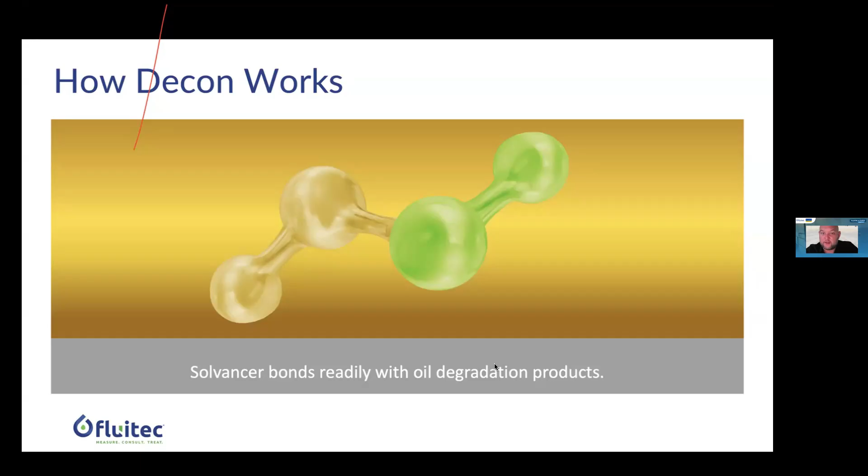This is forming a new molecule, and this molecule is no longer interactive, right? So Decon has stopped the interactiveness of the molecule. So when we have this in your system, it's a little bit different from before, because they are not interacting with each other. They're not friends anymore, they don't like each other, so they will just stay floating around, but nothing happens.

In the previous slides, we saw the agglomeration of the molecules, but with Solvancer and Decon in your system, this is not happening, so there's no agglomeration. That means the oil never has to vacate them. It never has to say, I don't like you, get out of here. You can stay in my fluid, I don't mind, I am perfectly able to absorb you. So they are very benign to the oil, and they continue to float around without forming any issues.

So this can be in your system for as long as you want, there's no problem that occurs from this. So that is the proactive way of using Decon. But what if we look at the reactive way? What if this varnish has already become a problem, and you have formed these layers on your metal?

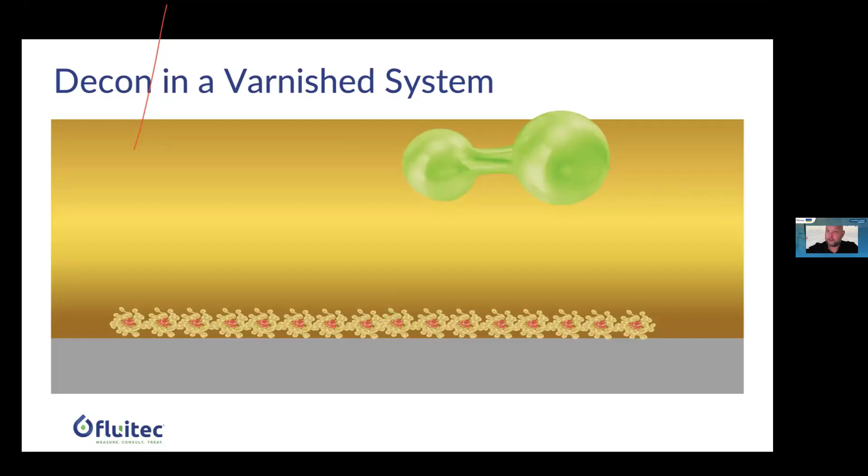Now we have Solvancer in the system, and through the same molecular forces, it is still attracted to these charged molecules that are already attached to the metal. As long as there is oil flowing past these molecules, Decon will be attracted on a molecular level to them. So it will like dissolve like, it will be attracted to the polarity of the molecule.

And once it goes into the polar heads of the molecule, it has dispersive forces. So the polarity is then reversed, and you get dispersive forces, for example, which dissipates this molecule. It makes this bond, because it's a soft bond, come apart and disperse the molecule into the oil. And when this happens, the oil is reabsorbing the varnish.

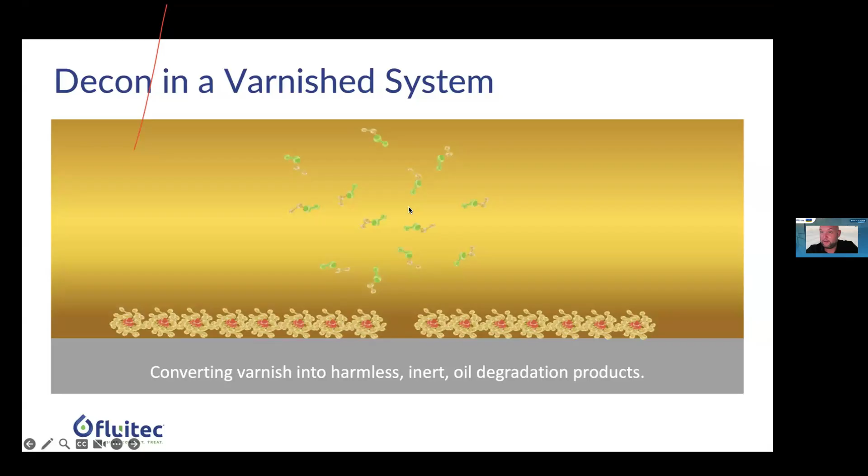And this will happen relatively quickly. You have a lot of solvent in your system, so it will convert these molecules into new molecules, and these are completely benign and inert in your system. It will continue this process until the varnish is gone. So you will completely dissolve the varnish present in your system, on your valves, on your heat exchangers, on your bearings, all these locations where varnish has settled on the metal. Decon will completely remove it.

Just to give you an idea, usually when we have a lot of varnish in the system, this equates to about 400 to 500 ppm of material. That's the actual volume of the varnish in terms of parts per million. So with Decon, when we add 3 to 5%, we're adding 30,000 to 50,000 ppm of solvents or molecules. We really want to overwhelm these varnish molecules with Decon molecules in order to combat this issue. We have more than enough molecules in the system to combat the varnish, and Decon will continue to work for a long time, probably long after you change the oil.

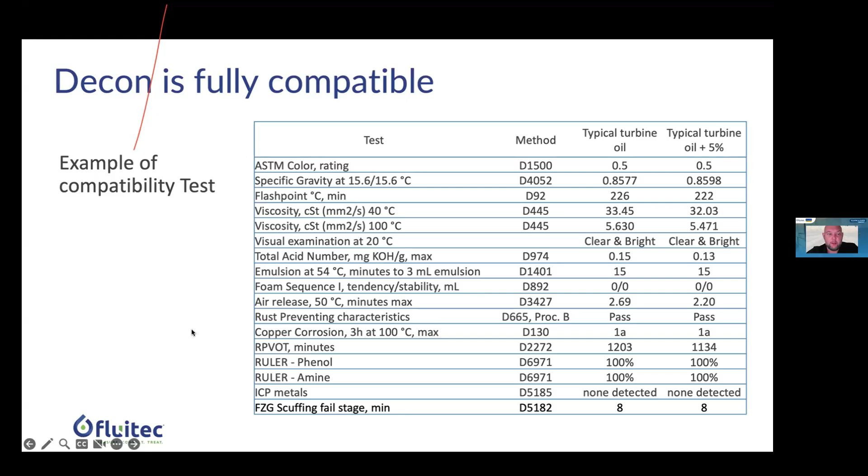If we have very severe varnish buildup, we can go higher in dosages as well. Decon continues to work in your system and is completely safe to use. We've done thousands of compatibility tests on Decon, so we can guarantee it's fully compatible with group 1 to 4 industrial oil. It works quite fast - within 72 hours, if you do an MPC test before and after, you'll see a significant drop. And within 2 weeks to 1 month, you'll see differences in the varnish in your system. So it will be cleaning up your system.

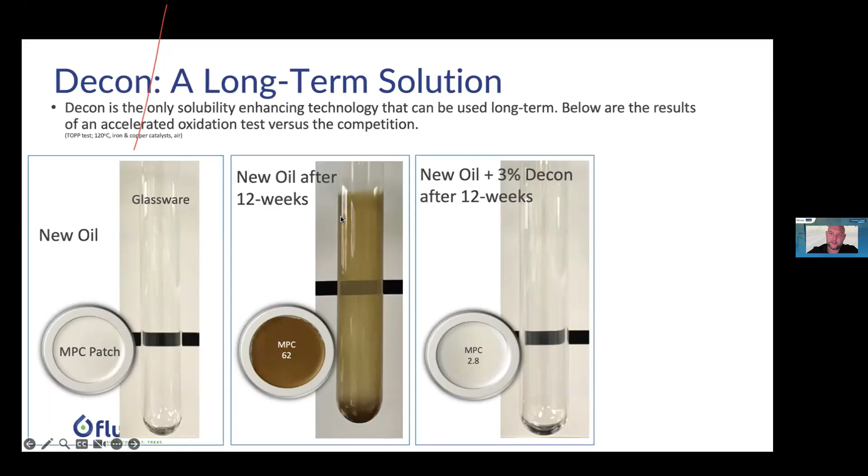What's unique about Decon versus other oil detergents is that it's safe to use for a long time. When we do the TOPP test again - remember 12 weeks stands for about 12 years of service life - after adding Decon at 12 years, there's no significant difference other than, of course, there are no deposits and no varnish. That's a very good result. But other cleaning agents, usually detergents, are not oil compatible. They may be very effective in cleaning varnish from your system, but if left in the oil for longer periods, they actually start to produce a lot of varnish and deposits. So Decon is currently the only long-term solution to varnish compared to competition.

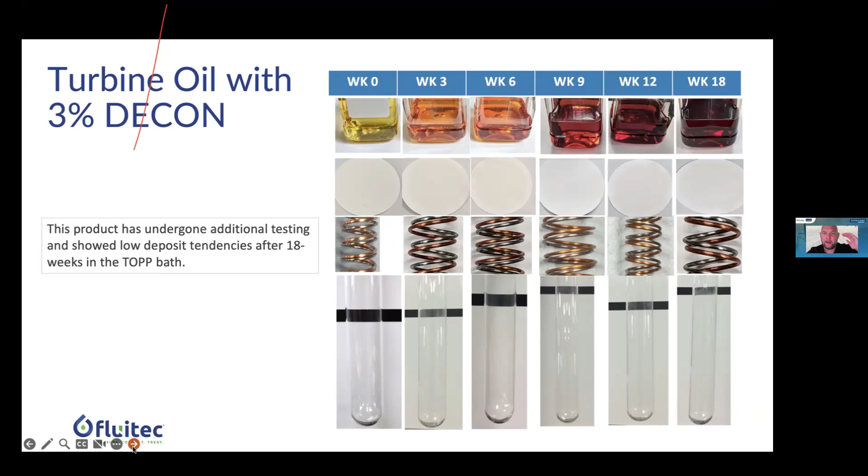We also stressed an oil with Decon for 18 weeks, meaning 18 years of real life. The additives were already gone, so no more additives in the oil. But despite that, Decon was still able to prevent buildup of deposits, as you can see from the catalyst coil and the glassware. The oil color changed a little bit, which is normal, but no deposits or varnish were detected. So Decon really gives you a high level of extra safety and insurance against deposits and varnish.

To summarize, what's most important is that it's a fully oil-soluble cleaner, and it's the only solubility enhancer that can be used in industrial oils that will be beneficial both short-term for system decontamination and long-term for varnish protection. This also works perfectly well in heat transfer oils and hydraulic oils. So it's not only limited to turbine oils, but we focus on turbine oils because they have the biggest volume of oil, of course. That is the solution to varnish.

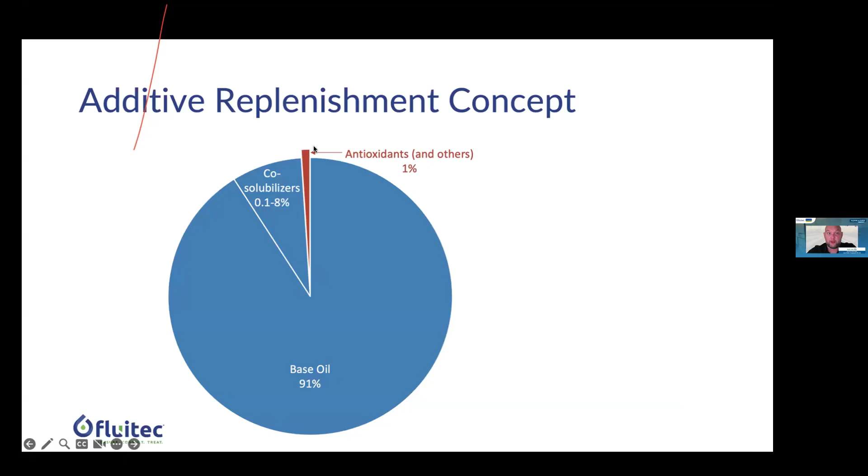But let's look at something else, because we want to maintain the health of additive systems in the oil as well. To really have a fill-for-life oil, we need to look at the additive system. If we look at the formulation of an oil, typically it's 99% base oil, which can include co-solubilizers and base oil, and then 1% antioxidants. Industrial oils, specifically turbine oils, are usually like this. But when the antioxidant performance, the additive level, goes down to 25%, we need to change the whole oil - meaning this 1% goes down to 0.25%, and then we change the whole thing. Sounds a little wasteful, right? And it actually is, because we've now devised ways to replenish only this 1% instead of changing the whole oil, since the rest of the oil is still in good condition.

So why would you want to throw it? We are going to replace just this 1% of antioxidants. Now, in order to do this safely, we need to look at compatibility, right?

For Decon AO, we are going to add chemistry to the oil, so it's a little bit different than Decon. We want to make sure that there's no issue, so we always do a before and after test, or a simulation test.

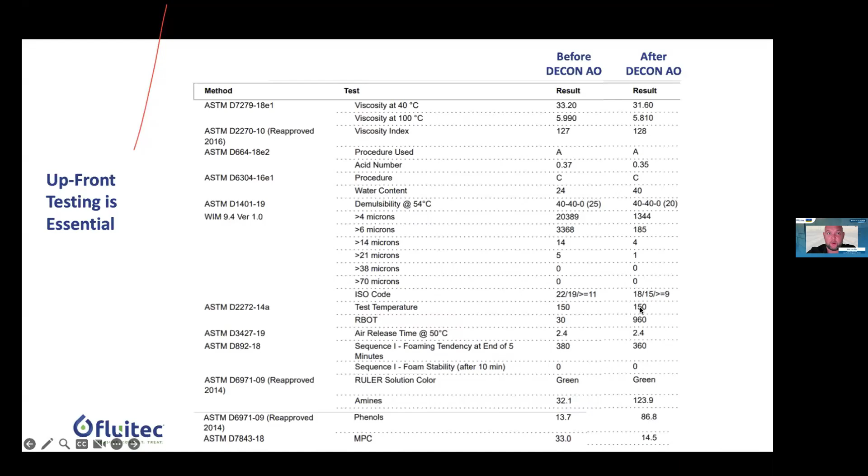So now we go from an oil that you cannot use anymore, you have to discard, to the same oil with 3% Decon AO - it's completely rejuvenated and you're back to almost a new oil level. So you can just reset the clock and continue to use this, because this oil doesn't create any issues, it is in a perfectly good condition. That is, of course, a big benefit to the end user.

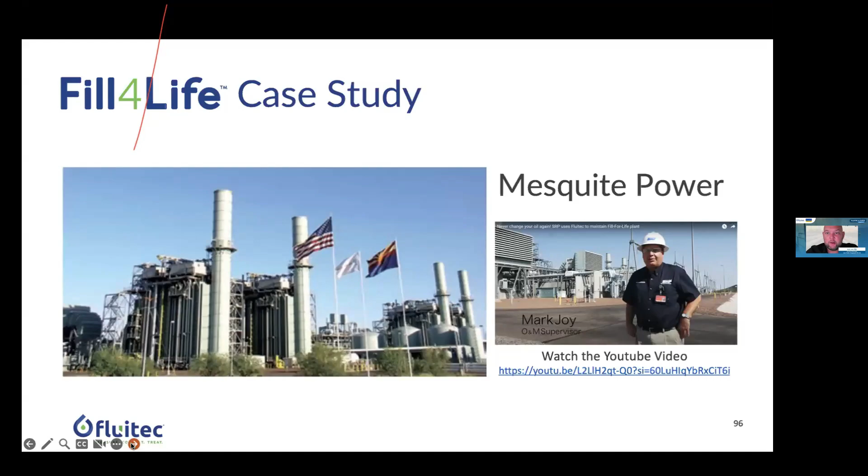Let me show you some case studies related to this, and then I think we'll be finished just in time. This is the oldest case study that we have with additive replenishment. In the US, $3.5 million were saved here. In 2012, they started to add Decon AO into their system, and they did it again in 2023.

So we can see that the life of the oil, here in a percentage, went up to 180%, and now again. So what does this mean for this customer? When we started, their turbine oil was 8 years old, but had to be discarded. Life was extended by 10 years - instead of discarding it, they used Decon AO, and now they have an 18-year-old turbine oil.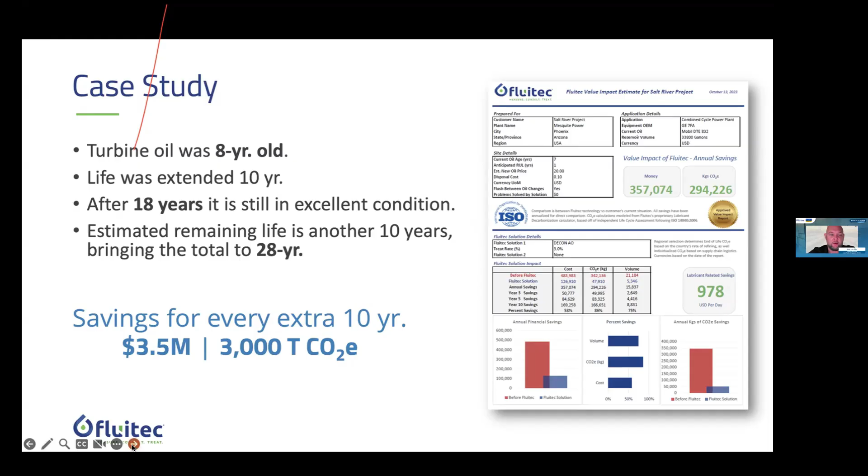So we saved the oil and then a little bit of extra. We think another 10 years is achievable, and then we go into 28 years of life with this turbine oil. And this is a big gas turbine, so you can imagine that this is not normal - that's why we call it also fill for life, because now we can go for a life cycle of a turbine with one oil.

So they had 6 units, a 1400 megawatt combined cycle plant, and all of these 6 units had similar results. So we expect to have 30-year-old turbine oils in these 6 large GE Frame 7 gas turbines. That's what we call a fill for life oil.

So this is in the US, but we also have some regional case studies in the power gen sector, for example, in YTL here in Singapore. They did Decon AO with Siemens together.

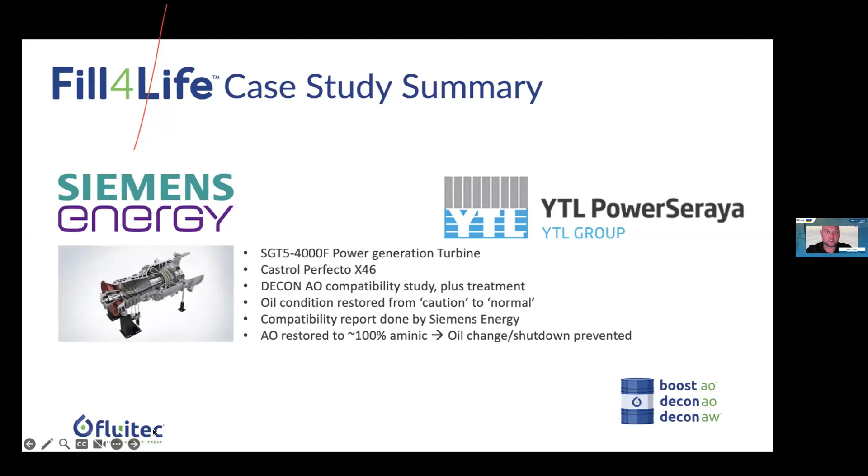They had an SGT5 4000F, a huge Siemens power gen turbine on Castrol oil. We did a decon AO compatibility study and then went to treatment. The oil condition was restored from caution to normal, and the compatibility report in this case was done by Siemens Energy. We were able to restore the antioxidants to close to 100% aminic, and again the oil change and shutdown was prevented. That's where the big benefit to this customer was.

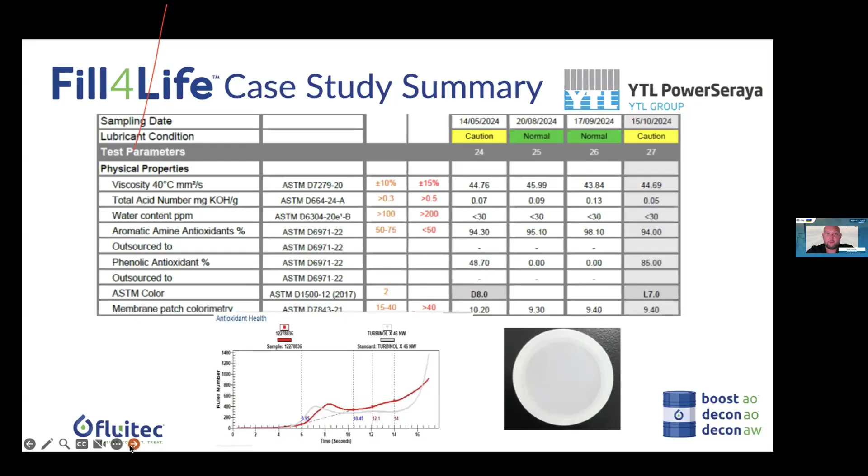So that means, let me see, where are they here? The phenolic antioxidant was 85% and aminics at 94%. This was October last year. It's now February, we recently got another report from them, and the oil is still in very good condition. The customer is using this oil for more than a year now without any issues, and we expect it to last a couple of years more. So we have really removed the need for an oil change, and that is beneficial to them in terms of cost and downtime.

Decon AO and ExxonMobil — this is something we were actually quite proud of, because ExxonMobil is an oil company, so you would expect them to want to sell as much oil as possible, not really adopt this fill-for-life strategy. But they still did, because it saves them so much cost. They say, we'd rather save this amount of cost because we'd need to sell so much oil to compensate for that, and that's never going to happen. So we'd rather save on the operation side, on the refinery side, because that gives us a lot of benefits. They really acknowledge the value of this methodology.

These were two Siemens Energy compressor trains, high MPC, also very low antioxidants. So 3% of decon AO was added, and the parameters were back to normal. This oil was also rejuvenated back to normal, and we expect it to last another 4 years.

And ExxonMobil was kind enough to give a presentation in May last year in Kuala Lumpur, at the Asia Turbomachinery and Pump Symposium, where they presented this life extension of the oil. This was very, very, let's say, revolutionary, because an oil supplier commenting that their oil could be life-extended and did not have to be changed was, I think, pretty revolutionary.

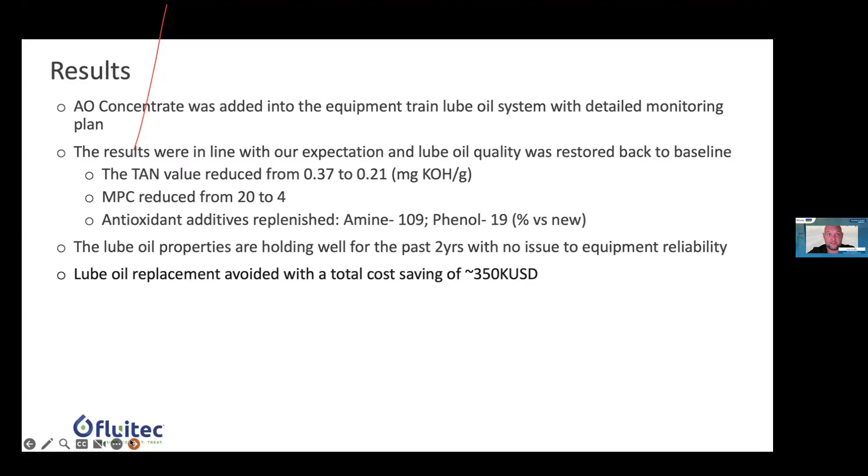MPC reduced from 20 to 4, antioxidant additives back to new. This is where you can see the savings again of 350,000 US dollars. And remember, this is a presentation from ExxonMobil, this is not Fluitec showing you this, this is our customer. What is very encouraging is that they changed their methodology as well. They went from a time-based oil change to a condition-based oil change, and they now accept that antioxidant dosage can help, changing the way they look at traditional lube strategy. So that's a big step.

We also treated some offshore platforms with this. And lastly, another thing you can use decon for is to prevent a chemical flush. A chemical flush is very invasive to your system because you're putting a lot of detergent chemistry through it, and detergents are incompatible with oil. If you do a detergent flush of your system, then add new oil after, and there's some residual detergent, this will immediately cause you a lot of problems. So a detergent flush is always a bit risky, and it's also not so good for your seal material in the turbine. We always recommend reducing the amount of chemical flushing as much as possible.

That can be done with decon as well, because when we do a varnish treatment and solubility enhancer, well before an overhaul, we always recommend 4 to 6 months. In practice that's of course not always possible, but you can also achieve good results with 1 to 2 months. We remove all the varnish by treating it and adding decon to the system. That means you can choose, without flushing, to change the oil system to a new oil. So even if you have no choice but to change the oil, you can still use decon to help dissolve any varnish, contaminants and deposits in your system. That means you don't need to use a chemical flush during your oil change, which significantly reduces your downtime, and it also reduces the cost of the oil change, because flushing chemicals and the manpower involved with that is simply very expensive.

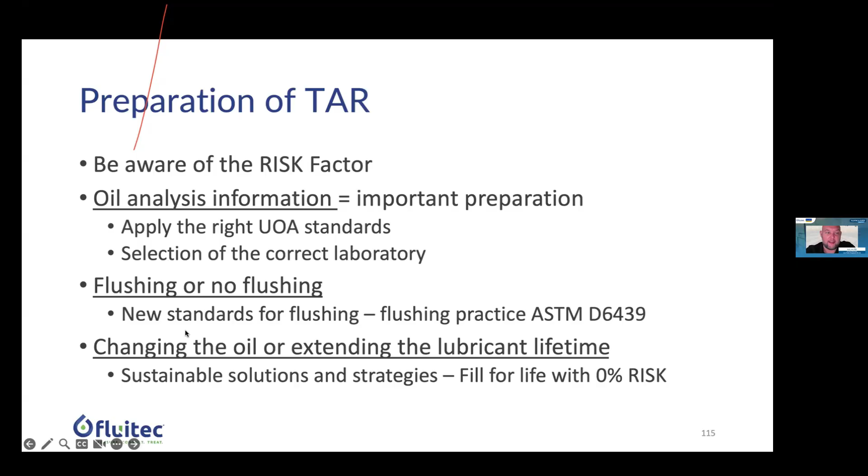So this is an example of what we did at MSD, a pharmaceutical manufacturer here in Singapore, a very high-end company with very complex manufacturing. In its solar turbines, they changed the oil from Shell to Mobil DTE, and they used Decon as a flush, so they did not do any chemical flush.

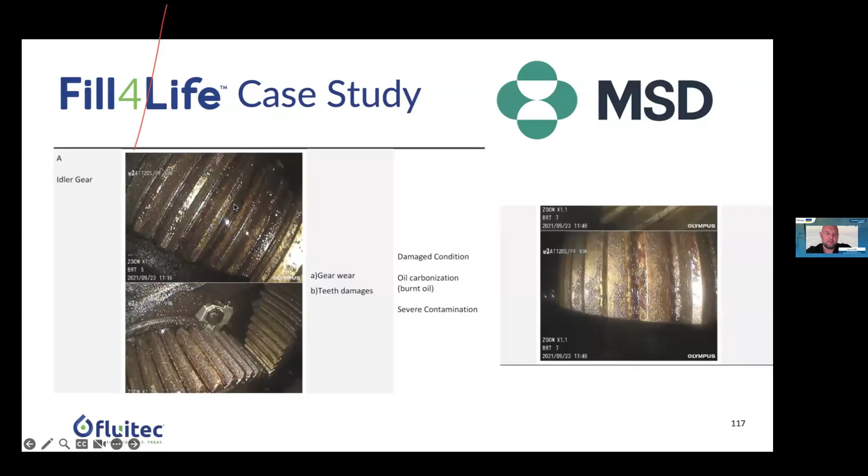And then we changed the oil, and after the oil change everything was running very normal. The additives were healthy, MPC very low. So very good results.

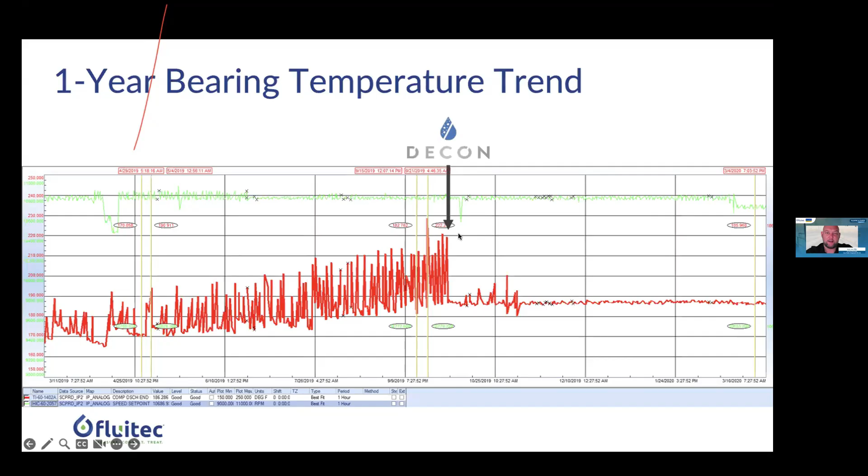We also see a lot of Decon being used to control these bearing temperature trends that we showed you in the beginning. So when we clean the bearing of varnish, the temperature will stabilize, and you can see that very clearly in this bearing temperature trend.

So another topic, in closing, I will talk only a few minutes about ESP. If you prefer to remove varnish via filtration, then we can use electrophysical separation, or ESP, to remove varnish from your system. It works differently from depth media filters.

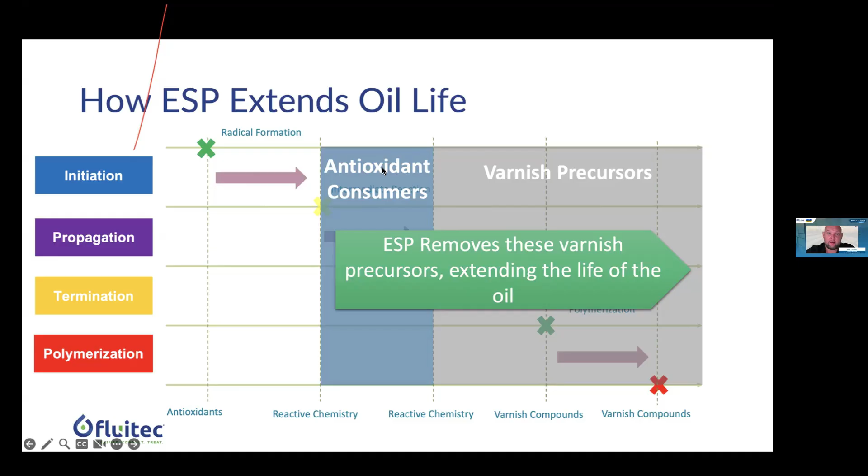What is beneficial about ESP is that it really takes out the antioxidant consumers. So it also helps to extend the life of your oil by at least 50%, because it removes all of these reactionary byproducts coming from oil degradation, and it helps the oil last longer and the additives be more healthy. We cannot prevent any free radicals from being formed, but we can prevent the reaction from going out of hand by removing the antioxidant consumers. That means you will have a 50% increase in oil life.

As you can see here, a 55% improvement in oxidation stability. And this is how that works.

So we can add resin media into the oil flow via a kidney loop filtration system. It's a very low oil flow because the oil needs to be saturated, or the resins need to be saturated with the oil for a while for this interaction to take place, and then these varnish constituents get really absorbed into the resin media.

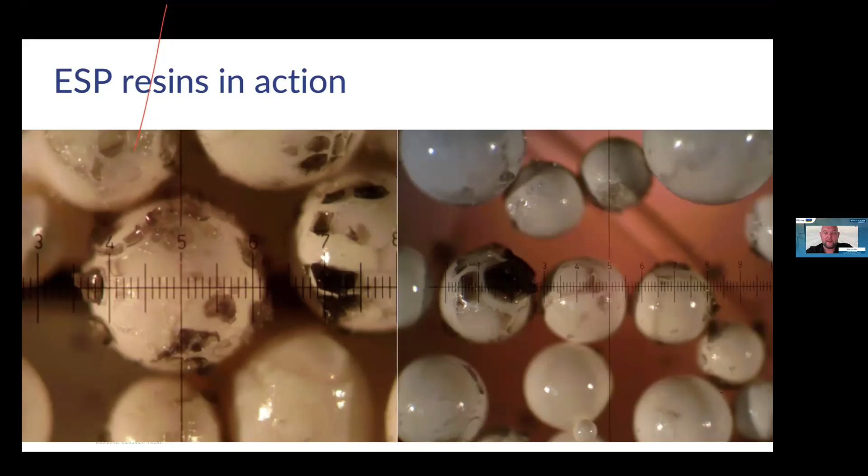This is what we have done, for example, in Senoko Energy in Singapore, one of the largest power gen companies in the region, with a 2,800 megawatt turbine. There was a Siemens Energy turbine and a Mitsubishi Heavy Industries turbine, also with Japanese OEMs. We have a good relationship.

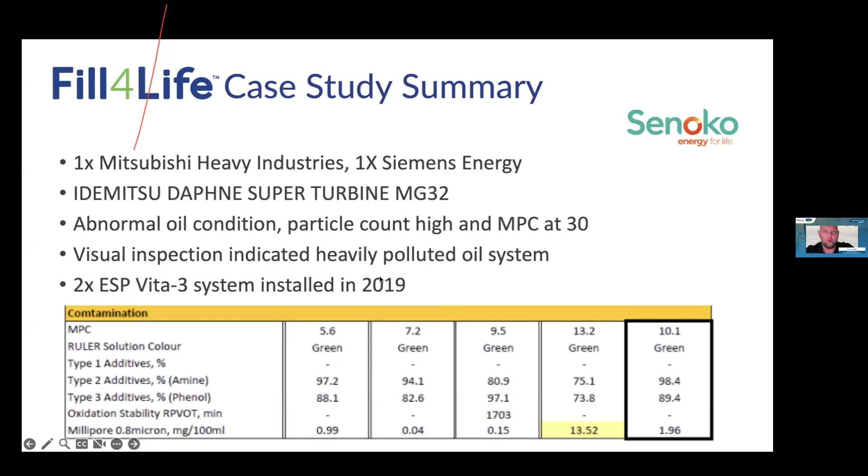You can see that the MPC here is very stable, remaining low since 2019, going from 30 down to 10.

Okay, so now we have reached the end of my presentation. I hope it was clear. I saw a lot of chats appearing, so I don't know how many questions there are. I didn't look yet, but feel free to let me know any questions, and thank you for the opportunity to present to you today.

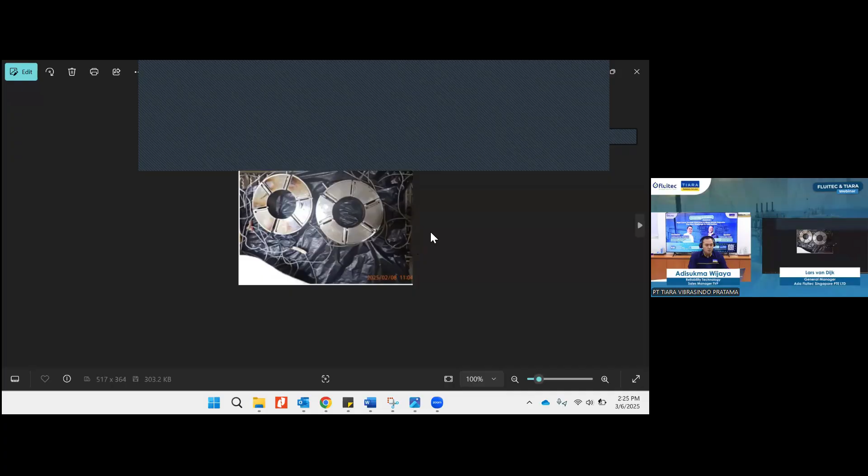So, this right one - can you see it? Yes, so this is very interesting. Can you zoom in a little bit?

This is a combination of both that I see, but it's definitely also shear stress deposits. What is very telltale sign of shear stress deposit is when you have an uneven distribution on the bearing pad. When you have bulk oil varnish due to oxidation, we typically see an even layer over the whole bearing pad. But with shear stress deposit, you really see it accumulating at one very specific point where the hotspot is occurring and where the oil is at its thinnest. And that's exactly what you see here in this bearing layer.

So you see on, let's say the top two on the left hand thrust bearing, the top two pads, right? They are the clearest visible. You see on the left side this brown spot that is much darker than the rest of the bearing, right? So this is exactly where the hotspot is generating the shear stress deposits, and that is where they are accumulating. So this is a very nice example of shear stress deposits.

So to confirm, is it shear stress or varnish, we can do the MPC test, or combine it with vibration? To be honest, this is the best conclusion that you can get because you have a physical and visual confirmation, right? That we can 100% confirm that this is shear stress deposits.